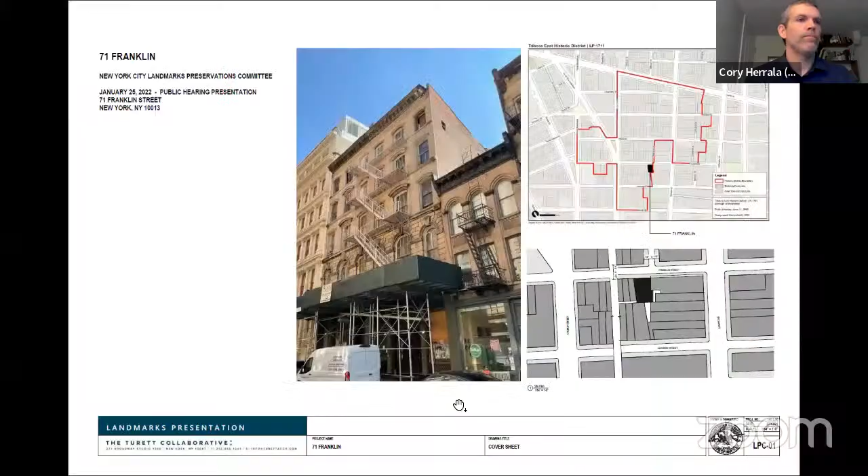Winnie, you're muted. Sorry, I was having some issues here. This item is 71 Franklin Street, located on the south side of Franklin Street between Broadway and Church Street in the Tribeca East Historic District.

Here are some historic photographs that you saw last month. Here is the existing and proposed axon diagrams of the building. And here are some streetscape photos.

The commission approved a proposal for a visible rooftop addition and alteration to the storefront infill at this building back in 2015. That approval has since expired, and the applicants returned to present a similar proposal at the public hearing last month on December 7, 2021, which included work at the vault light covers, replacing storefront infill, replacement of windows throughout the front facade matching the historic windows in terms of configuration but not in terms of operation, and the construction of a rooftop addition. At the public hearing last month, the commissioners present expressed concerns regarding several aspects of the proposal.

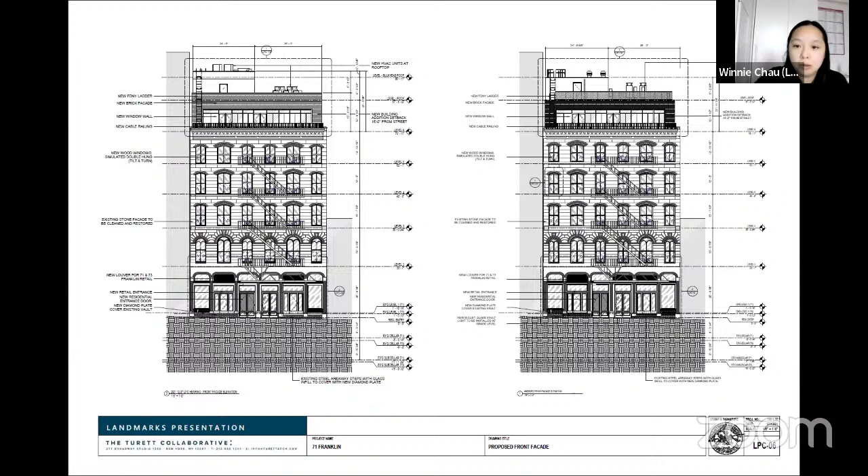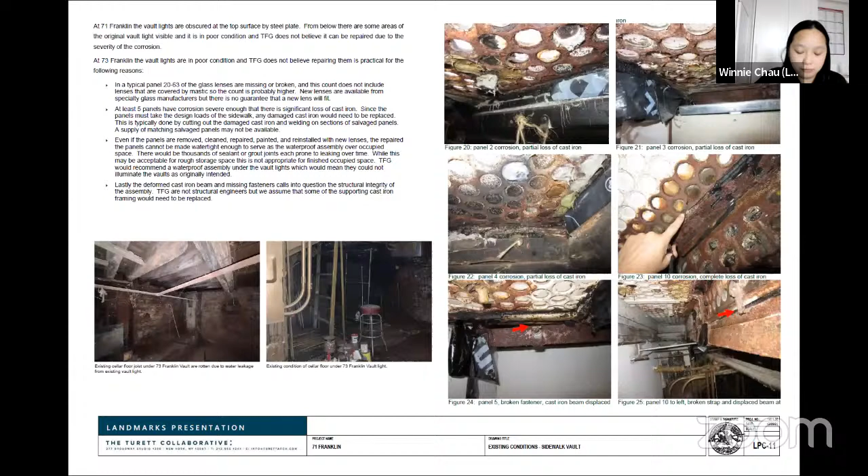While supportive of the general configuration of the storefront infill, some commissioners expressed concern over the removal of the historic transom bars and paneling at the infill. In response, the applicant has modified the design of the infill at the base of the building to incorporate a

dentillated transom bar matching the historic one across all the bays at the base of the building. Here are the proposed elevation and plan that was shown last time on the left, and the new revised additions on the right. And here are some close-up details and sections.

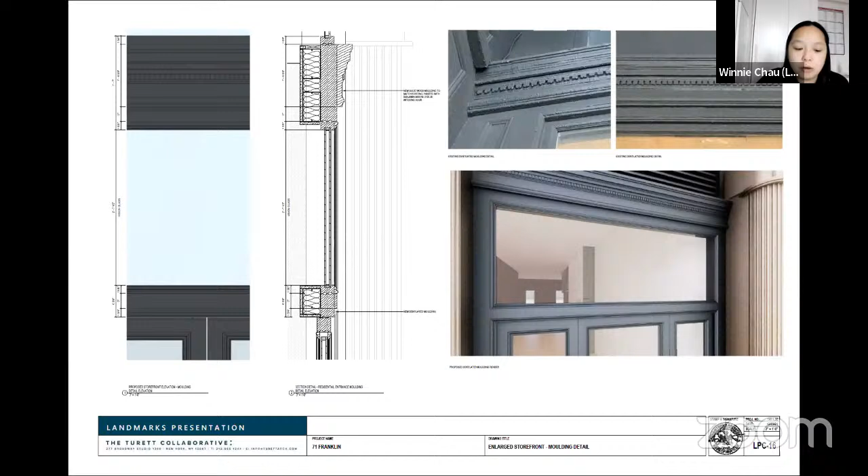Here are some close-up photographs of the existing historic transom bar on the upper right that they're proposing to replicate at this time. Here is a close-up of that plan view. And here are some renders of the new revised proposal at the base.

So with regards to the replacement of windows, the commissioners expressed support for the change in operation. However, some commissioners were concerned with the details of the replacement window. In response, the applicant has worked with the windows manufacturer to refine the window details to ensure that the replacement windows will match the historic windows as much as possible while allowing for the change in operation.

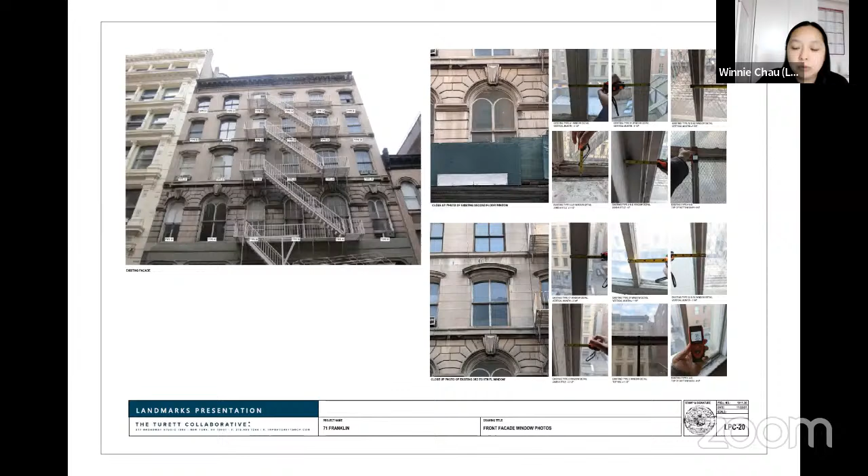Here are some close-up photographs of the windows, and here are some of the detail drawings for the different window types.

With regards to the rooftop addition, the commission expressed a consensus of support for a rooftop addition. However, they were concerned about the height and finish of the addition and detailing of the cladding materials. To address this, the applicant has changed the solid parapet at the addition to a cable railing and the parapet at the elevator bulkhead to a curb with safety railings where needed only.

The color of the addition has also been restudied and is now proposed to be gray instead of off-white. The applicant has also added additional details regarding the proposed brick and stucco cladding and is proposing the brick to wrap the corner of the addition as shown in the details on the slide.

This slide shows the change in the parapets of the addition. The applicant has also relocated the mechanical equipment previously proposed at the roof of the stair bulkhead to the roof of the penthouse to remove the bulk at that location.

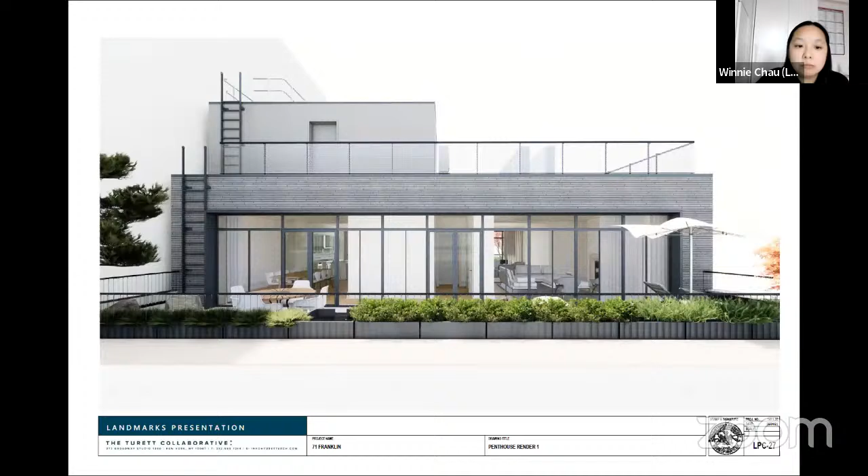Again, the previous proposals on the left and the new proposals on the right, and here are the refined details for that. Here's the revised render close-up of the penthouse addition.

And here are the modified renders at the sidewalk. Again, the mock-up is on the left, the previous proposal is in the center, and the new proposal is on the right.

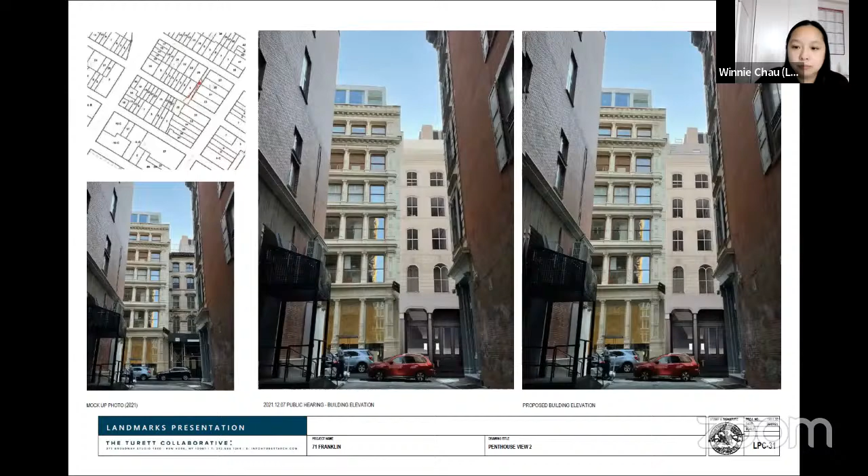Commissioners, do we have any questions for Winnie or the applicant?

Okay, and I just want to confirm they did revise the window details so that they're closer than previously presented. Yes. Okay, great.

All right, and I'll just also note for the record that we did receive a written letter in opposition from an individual on this revised proposal.

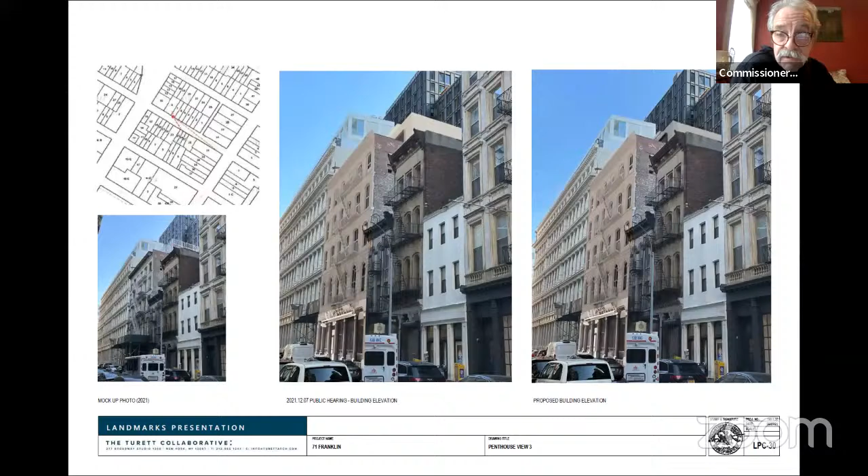Okay, Commissioner Devonshire? Yeah, I think it's much improved, and I agree with most of Ann's comments. And with regard to the sidewalk vault, I'm happy that they've seen the light.

Okay, Commissioner Chen. Yeah, I'm glad anyone is enlightened. I agree with Ann, Commissioner Devonshire, and the other commissioners' comments as well. I think it's appropriate.

And Commissioner Lutfi. I agree. I think these are changes that have really refined the project and make sense. I can definitely approve it. I also appreciate the fact that they have been working with the window manufacturer and the staff on the details of these windows, and I think they should continue to work with staff.

Jefferson, I think last time you hadn't seen enough information to comment, but at this point you've seen the response. So how are you feeling? I think on all 4 items, much improved. I can approve this. Commissioner Gustafson.

Yeah, I think I agree with the fellow commissioners. I think this is appropriate as is. It seems to me the applicant was very, very responsive, and it seems like a win-win, one of those situations where we commented and the applicant gets what they want in terms of the changes they need on the building, and they do it in a way that is appropriate. So I'm grateful that they listened.

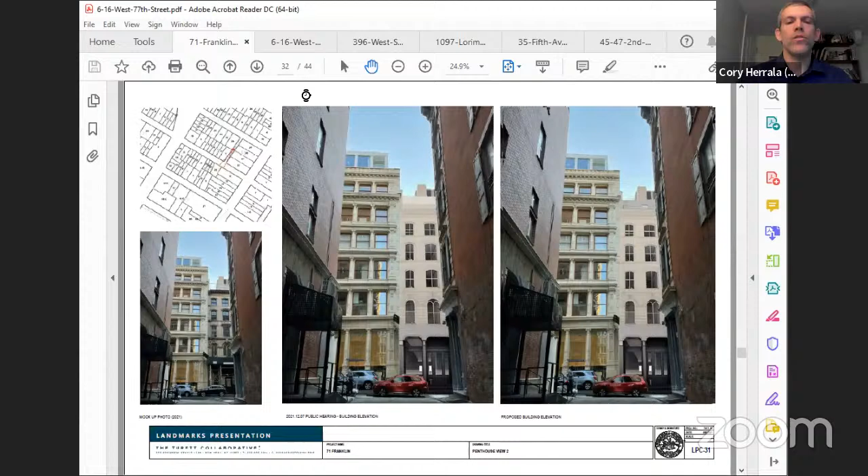An application for a certificate of appropriateness in the Borough of Manhattan, Block 1129, Lot 39, 6 to 16 West 77th Street in the Upper West Side Central Park West Historic District. This is a neo-Renaissance style apartment building designed by Nathan Korn, built in 1927, and the application is to construct a rooftop addition. This was last presented at the public hearing of November 16th, 2021, and no action was taken at that time.

The staff will do a brief introduction before the applicant presents the revised proposal after we open the proceedings. Okay, great. And I think I'll just go ahead and suggest that we do that now so that it can be a seamless transition when we get there.

So Commissioner Jefferson, would you make a motion to open the proceedings? I make the motion. Thank you. Commissioner Lutfi, would you second that motion? Second. All in favor, say aye. Aye. Any opposed? Okay, so the proceedings are open and the applicants may speak after the staff introduces the project.

Good morning, Commissioners. Julianne Wiesner-Chianese, Preservation Staff. The proposal as presented at the public hearing of November 16th, 2021 is to demolish a rooftop addition and to construct a new rooftop addition. At the public hearing, a majority of the commissioners expressed support for the proposal. However, some commissioners had concerns about the degree of visibility of the proposed addition from Central Park West and Central Park, especially the 18th floor, and requested that the applicants restudy the placement and massing of the 18th floor.

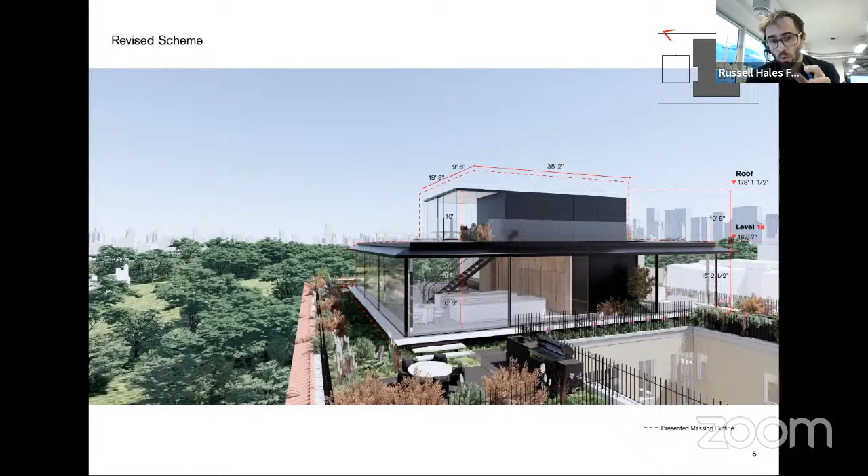So here's a render of the new proposal. You're seeing it from behind here, but you can see the upper mass, the darker element, that's the MEP component, now reduced down from 12-foot to 9 foot in height, and seeing the edge of the glass box.

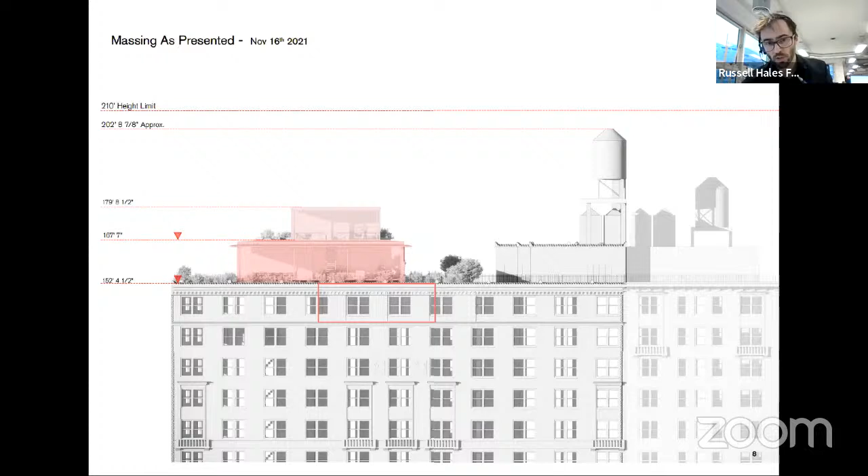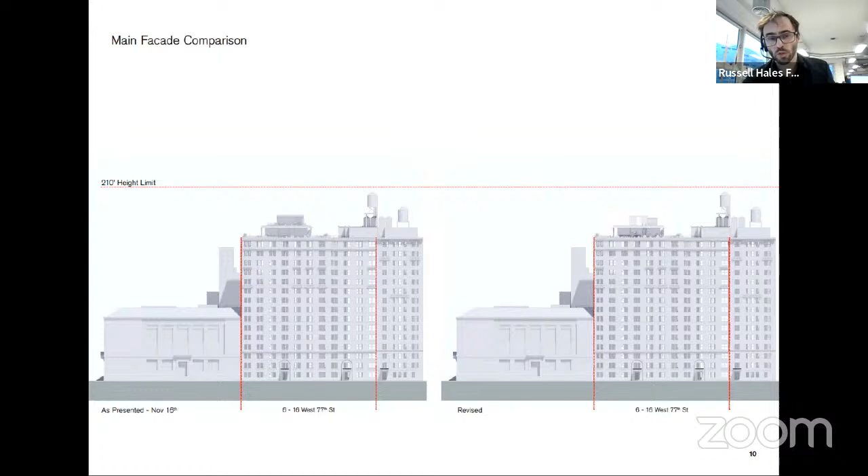But with our new design, you can see the overall width is reduced and the height has come down. The slightly faded pink box shows the new massing that's visible from the street. It's really a third reduction in its width, and here's the side-by-side comparison, thinking about how we can reduce its presence by breaking down that massing upstairs.

Looking at the cross section where we were before, and stepping forward to the next slide, the big moves here are by making these changes and changing the detailing, removing sliding doors and making the glazing more fixed at the upper level, we can reduce the detailing around the edge and bring that height down by the 1 foot 7 inches we mentioned. On the western side, the MEP component is brought down as well, to try and create a much more lightweight construction overall.

Volumetrically, it's about 17% smaller, but significantly the upper roof is 30% smaller than the overall roof we had before. We've studied, and we're working with Silmans, the engineers, to look at opportunities to reduce and compress the level 17 floor build-ups. There's an ongoing discussion that we may be able to get a few extra inches out of that steelwork, but it's very important to spread the loads into the existing micro columns that run through the building.

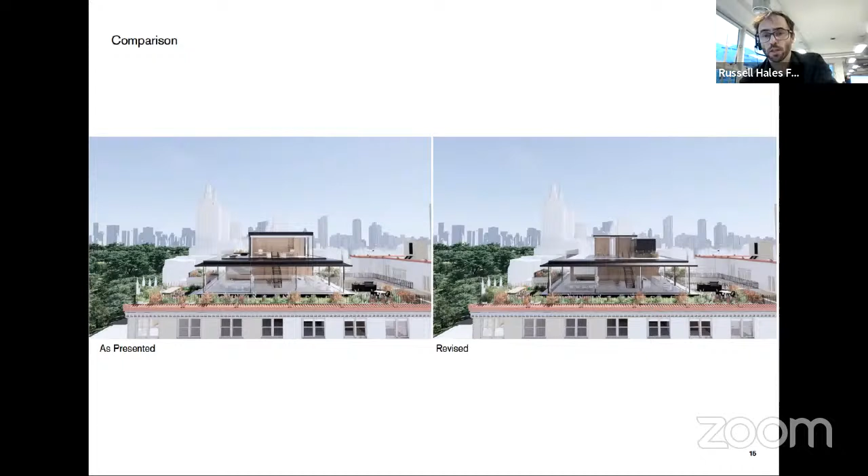We feel the upper box is the dominant element that's visible, and that's the one we've put the most focus on to try and reduce the visibility. So the render we showed you before, as you can see in the upper box, slightly heavier detailing at the very top, and then showing a side-by-side comparison with the previously presented on the left, and the revised architectural solution on the right.

Just moving downstairs to level 17, no real changes here. And then we have the lower level embedded within the historical building, where we have the 3 further bedrooms down here.

And then going back up, a viewpoint you would not normally see because we're floating outside the building, but recognizing now the change in detailing for the upper level 18 box, a much more slimline edge detailing, similar to the lightweight filigree steelwork within the neighboring dunnage.

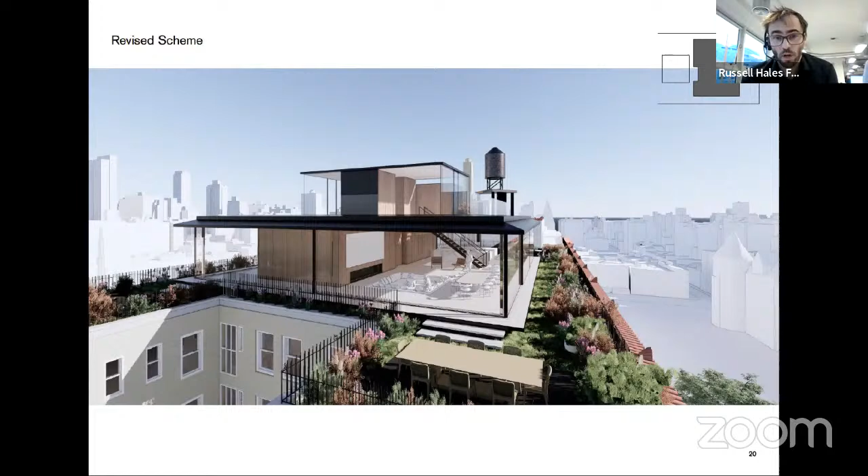We've studied this a lot from a visibility point of view, but we actually think architecturally it's a much stronger scheme than where we were before. So we do thank you for the opportunity to come back and share this, because we think it's actually helped push the scheme on further.

So you're really seeing the comparison side by side here, which I think tells a lot, that you can see the bulk and the mass has been reduced and it's much more lightweight. So it has a different architectural solution. It's the same family for the upper level, but much more lightweight.

Looking at that from the northeast corner and then showing the revised. Within here, it's not just the height that's come down, it's the overall footprint of the living space - the studio roof has been reduced by 30% in this configuration, which makes a big difference from the viewpoints. And then the side-by-side comparison here.

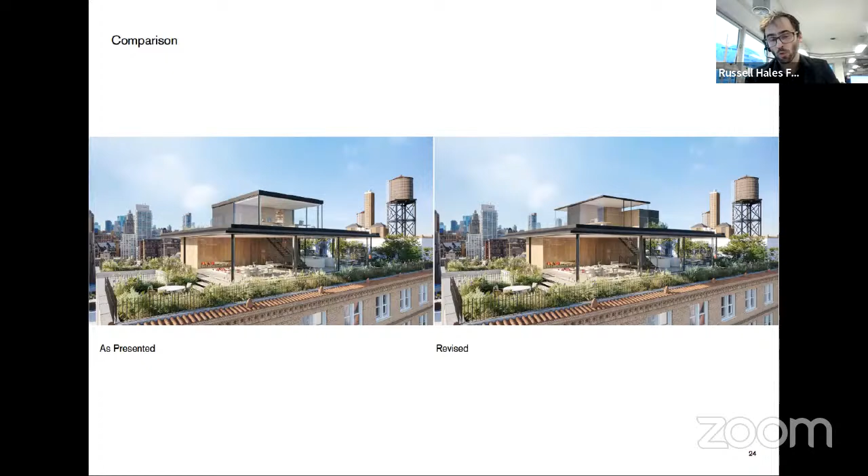So on the right-hand side, much more lightweight. But again, still having the pavilion for the main floor downstairs, which is respectful of the original footprint.

And then a few of the street viewpoints, obviously existing conditions seen from the park. And the next slide shows the previous proposal.

You can see at the top, the level 18, where we're looking very dominantly at that solid mass. But in the revised scheme, it's much more fragmented and lightweight now. So it blends much more into that rooftop dunnage and becomes much more subservient to the floor below.

So quieter in its nature by being more camouflaged into the background richness of the rooftops. And again, side-by-side comparison.

And again, a few viewpoints looking at the existing conditions here. As we showed previously, recognizing that the level 17 box is visible, but what can we do to reduce the level 18 box on top?

And in the new proposed scheme, reducing that east-west dimension helps to create a much more lightweight presence on top, and the side-by-side comparison.

And then the views from the park, the existing condition, and then where we were previously, feeling much more asymmetrical, where it's kind of north facing the glass box. Now a more balanced approach architecturally with the slimline roof, and the mass on the level 18 is where the existing elevator overrun sits anyway.

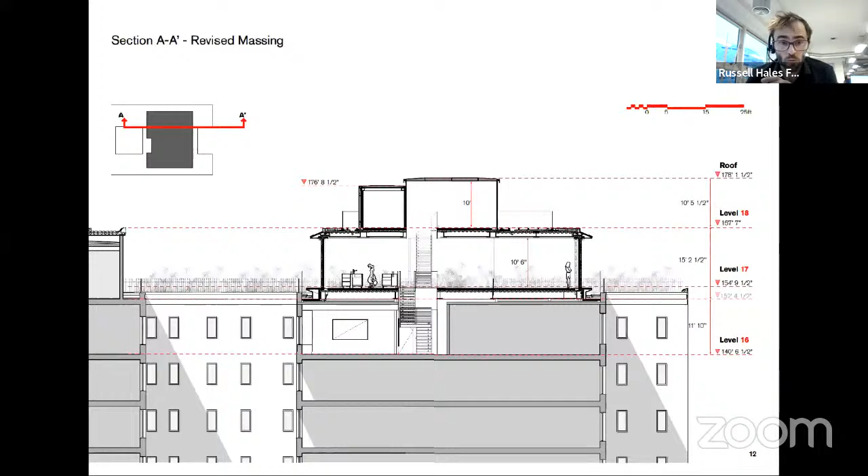Okay, so I think that is our presentation for today. Again, I think the important thing for us is the opportunity to go back and rethink the architecture for the upper level. We think the scheme is better for the conversation and for the redesign, both from a visibility point of view, but for architectural clarity as well.

So thank you very much.

Thank you very much. Commissioners, do we have any questions? Yes, Commissioner Goldblum, please go ahead. Thank you. Thank you for the presentation.

So forgive my ignorance, and you probably did cover this last time, but I just want to understand the bones of the scheme. The elevators are being brought up to the 18th level because they are an overrun of the elevation of the elevators to the 17th floor to provide access to the new penthouse.

Is that correct? Or do they provide access to the 18th level as well? So the elevator overruns that we see in the existing condition and in our design are existing - they are already there and they are servicing level 17. So there's no actual elevator stop at level 18 itself. That's the physical overrun of both the goods elevator and the passenger elevator.

So the top of the current elevator overrun is where you're showing your revised top of mechanical penthouse? Correct. So in the revised scheme on the right-hand side, the upper roof, the glass enclosure, aligns with the top of the elevator overruns, obviously including waterproofing etc., roofing over it, but that's now aligning with those elevator overruns.

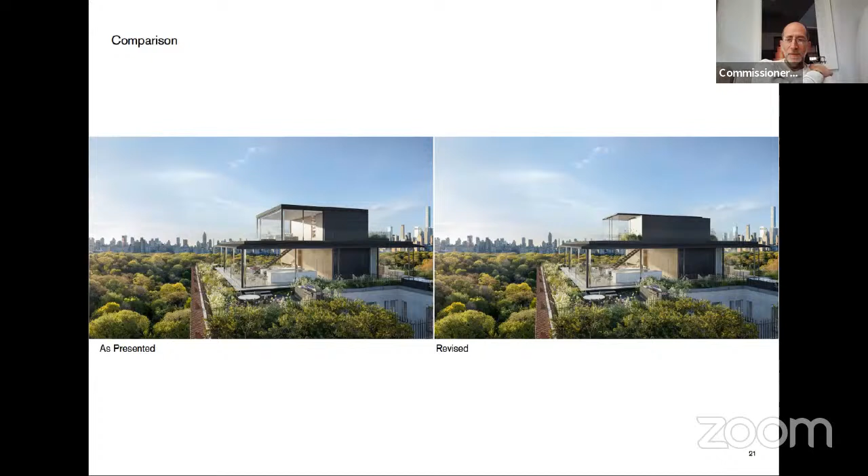The thing that makes this unusual is the 18th floor element. And I think the general comments before were suggestive, if not requiring, that it be removed. I think it would definitely be a better application if it were removed. But I think that if it's going to stay, it should have a reduced volume.

Okay, thank you. All right, and Commissioner Chapin, I think last time you were largely also supportive of the design approach. So how are you feeling with the changes we've seen today?

I think the changes are very positive. It's a fine design, and I think it's quite minimalist in approach, and I think that's a good thing. I think it is in the context of a number of other rooftop additions, and I think the idea of a modern addition here is perfectly fine. It is visible, there's just no question about it. It's going to be visible no matter what, as was the current situation and a lot of other rooftop additions on the Upper West Side and on Central Park West.

I think that Michael's comment is probably appropriate in my view. Lightening it up a little, I wouldn't go to a white, but maybe a lighter gray that could blend in a little bit more would lessen the visibility and call less attention to itself. But I personally think it is appropriate, even though there's an additional floor. I think that's the way they've put it together at this point. I could approve it as presented, with the suggestion they work with staff on getting a color that's a little more likely to just blend in with the skyline.

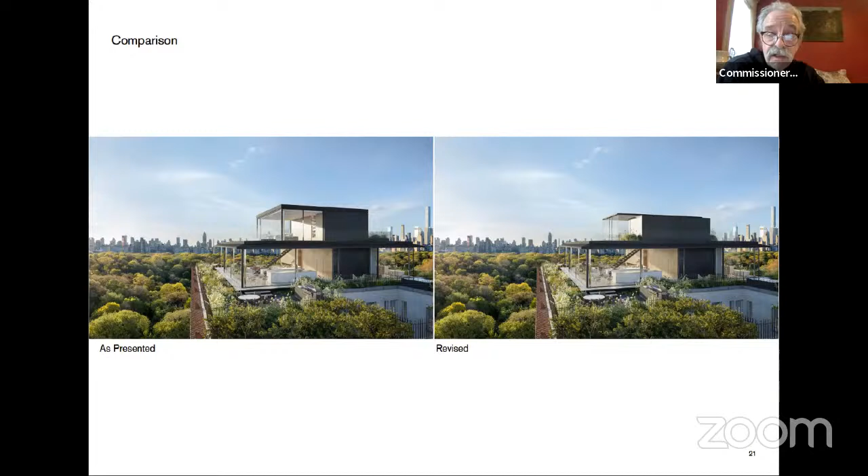Okay, thank you. Commissioner Holford Smith. Yes, well, I appreciate the changes that have been made. I missed the first presentation, but I agree with some of my fellow commissioners in that I think it is still very prominent. And as Michael Devonshire just pointed out, at night it is going to be this glowing box up there.

So I think the lower volume, the 17th floor, currently has a 10'6" interior volume, and I think that could certainly be lowered and still be very gracious. That would help reduce visibility all around. I agree with the color of the metal—I think it should be more like a zinc color. And I think that's true for all of the metal, not just the bulkhead, mechanical bulkhead, but all the roof eaves and everything, just to help reduce the contrast of this against the skyline.

But I think it should be brought down, and potentially even brought in a little bit, to reduce its visibility.

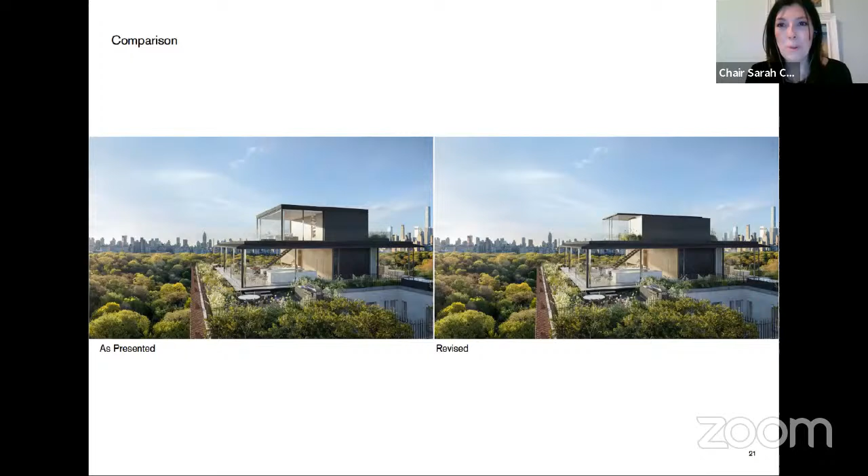So I think where we are is, again, we will take no action and we'll ask the applicant to continue to study this and think about our comments, which really speak to lowering both floors, looking at them holistically, and thinking about how you can reduce the visibility and explore the materiality and finish of the metal to help the addition blend and recede into the typical roofscapes we have on the Upper West Side. So we'll take no action and ask the applicants to come back when they're ready with a revised proposal. Thank you all, and we'll move to the next item.

The next item is public meeting item number 3, LPC 22-00769, an application for a certificate of appropriateness in the Borough of Manhattan, Block 636, Lot 41, 396 West Street, in the Weehawken Street Historic District. This is a neo-Renaissance style hotel designed by Charles Stegmeyer and built in 1903-04. The application is to install storefront infill and signage, alter the facade, and construct a rooftop addition. This was last presented at the public hearing of November 23rd, 2021, and no action was taken at that time.

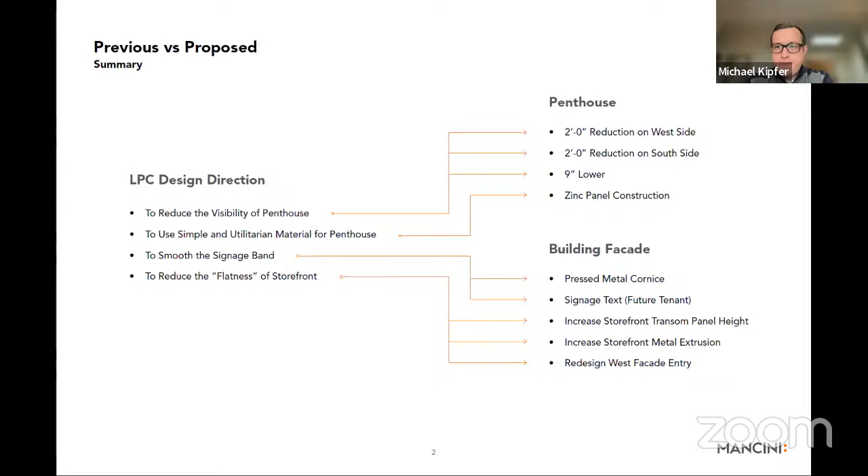Michael, are you there? Yes, I'm here. Okay, all right, I'll get started. So I'm Michael Kipfer. I'm from Mancini Duffy Architecture, and we're representing the applicant for this location. As James pointed out, we have come back with a few redesign items that we'd like to present to you, and thank you for hearing us today.

So to just jump right into everything here on the screen, you can see a diagram generalizing some of the comments that were made and some of the actions we took. To reduce visibility, we inset the penthouse 2 feet on the south and west sides, and we also lowered the penthouse. We used a new type of construction and materials for the penthouse to address the notion of simplifying its materiality, moving to more of a utilitarian material that didn't compete with the building's historical character down below. Then at the bottom, there was a lot of talk about the previously presented brick sign band, so we moved that to more of a pressed metal solution, and we reduced the flatness of the storefront in general by adding different types of profiling to help add more depth.

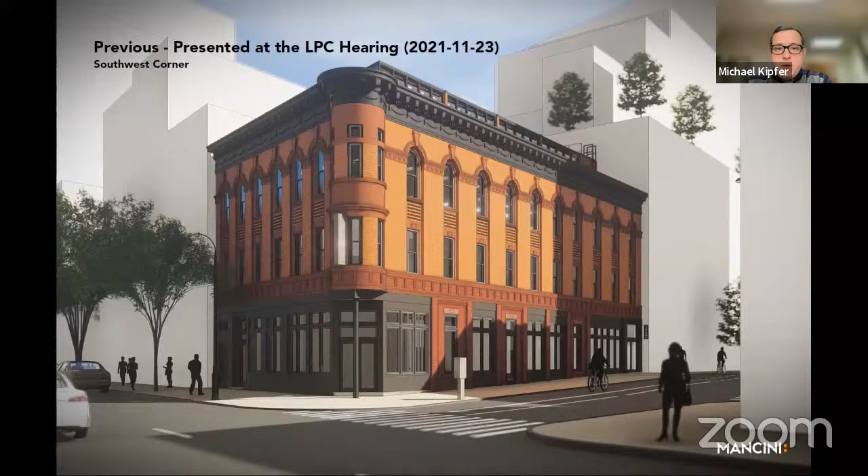Going up to kind of the general view of the project, this is what was presented at the last hearing. I think the biggest move we're going to make here—I have the revised one on the next slide—is just how much contrast there was from the penthouse above and the pressed metal cornice above, and then down below, the brick sign band, and if that could have a more appropriate solution to what was probably originally there.

So going to the updated render, obviously from this specific view, you can see the biggest change is the inset 2 feet on each side and lowering the penthouse 9 inches. At least from this view, that settles the visibility problem. I'll move to the next slide in a bit that shows the penthouse design.

But down on the street level, you can see we added a more simple streamline signage band with a pressed metal cornice solution. The idea here is not to have too much going on in the sign band. We don't want to detract from all of the details in the second and third floor, with all the terracotta ornamentation and the lovely existing cornice on the building that we are just restoring.

So we wanted a more utilitarian focused sign band down here instead of trying to add too much decor to everything. The storefronts have also—we've increased the depth and the profiles on the storefronts, and we've raised the glass as well, which you'll see in another slide, just so it has a little bit more of a bold presence.

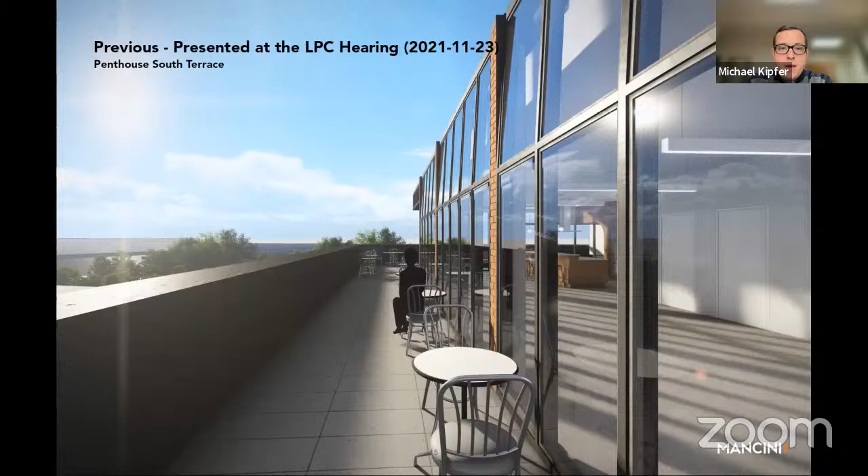I'm referring to them as inset piers, where the windows, through their mullion character, are creating that repetition. And once again, you can just see how we inset the building from the edge, just to get a little bit more sky in there. Coming down to the other side, the original design, you can see those piers coming from the building, and then obviously a large setback in the redesign that was considered.

Our previous design, moving in toward the storefront level and the sign band—it exists today and throughout the majority of the history as just a backer brick that has stayed at this transom level throughout time. The original design was just trying to spruce that up, but we do agree that some type of cornice, a banding, a cap to the storefront is appropriate here.

So we added a more simplified utilitarian sign band here. It's still pressed metal, and it's still capping the lower level piers that are coming up, because the piers do change as they go up to the second and third floors. But it still has the character and some of the seams that help cap everything.

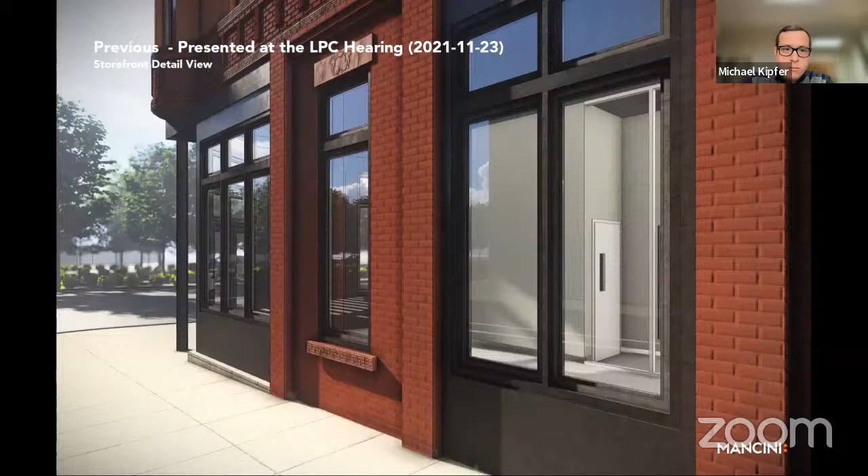Moving on to more of a zoomed in profile. One thing I want to point out here, this is the original design that we had presented previously. You can see there's a lot of layers in this storefront level, especially at the transom header. So moving on to the new design, we just raised up that transom glass.

We think it brings a lot more of a consistent nature to the storefront level. And you can see some of the profiles that we've added to the vertical and horizontal mullions of these storefronts to help bring the depth out in this. And you can see we have the current backer brick more in line with these piers. We've protruded the cornice a tiny bit out just so that it caps those piers and sets you up for the transition to the upper levels.

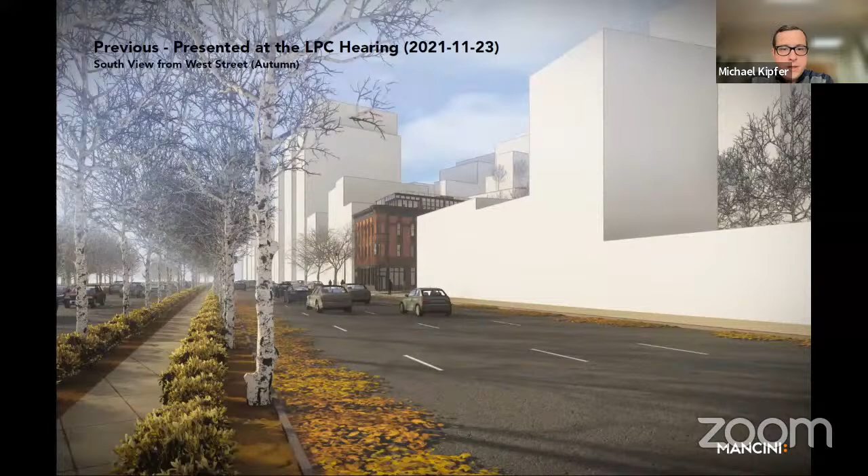Here we're just going into the fall pictures. That was the previous penthouse, and here's the new revised penthouse. Once again, a lot more of a utilitarian, neutral context that it's generating. This is the previous one, you can see the profile that's happening there, and then the new one where it's set back a lot more and is just a lot more neutral.

I'll kind of just jump through these. Here's another view of that. Moving on to the specifics.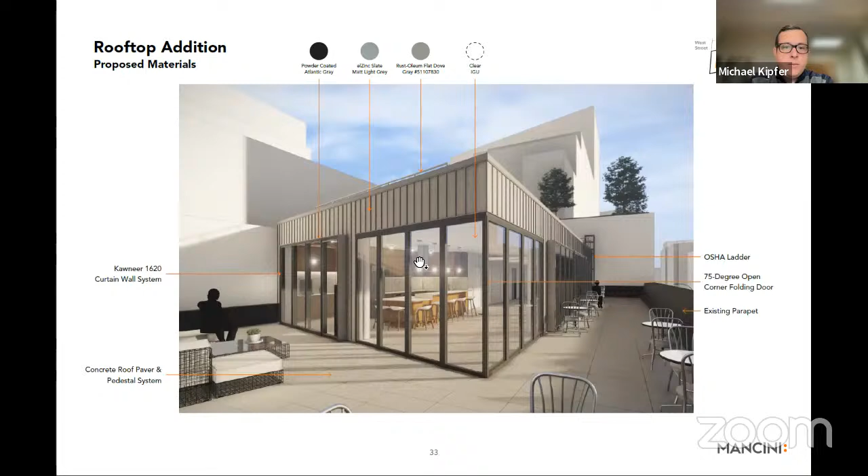So we are going for a glass system with a black powder coated mullion system. And then there's this really great material, a standing seam zinc cladding system. The gray is very neutral, not too bold, not too shiny. It provides that nice neutral background with the materiality that's going on there. Here's just a little bit more zoomed in of all the components that are there with the zinc panel and the storefront system.

A few elevations, and these are just really more to show the reduction in height that we proposed in the offset from here. Once again, 2 feet and 9 inches.

The plan just to show, we're slowly creeping in when we did that offset on the usable nature of up here with, once you count in the core, the egress and the ADA access that we have in here, we're left with just over 14 feet of usable space of the penthouse. So we thought the 2 feet achieved what the commissioners were asking as far as trying to reduce the visibility while also keeping the minimal usable square footage up here to make the penthouse.

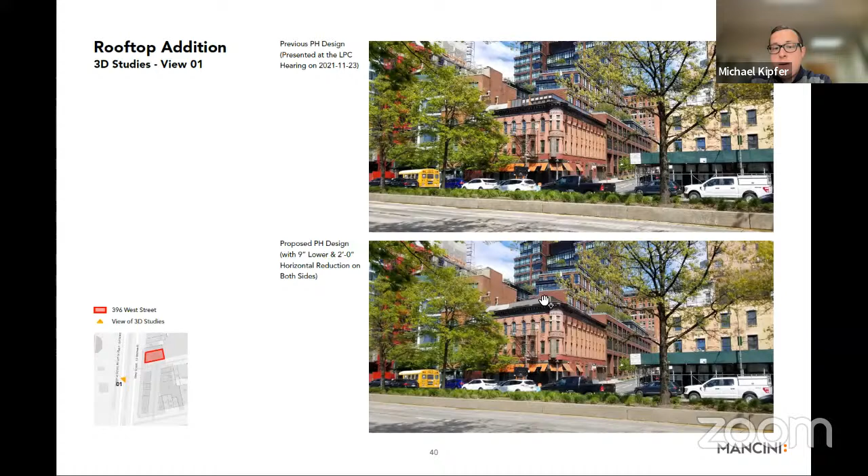We did update all of our view sheds. So here on the top of each page, you'll see our previous digital mock-up, and down here you'll see the new proposed mock-up. Once again, just getting rid of all of the complex character that was happening, still keeping a nice contemporary slim form, but not necessarily competing with the cornice. That was the really big thing, making sure we weren't competing with the cornice.

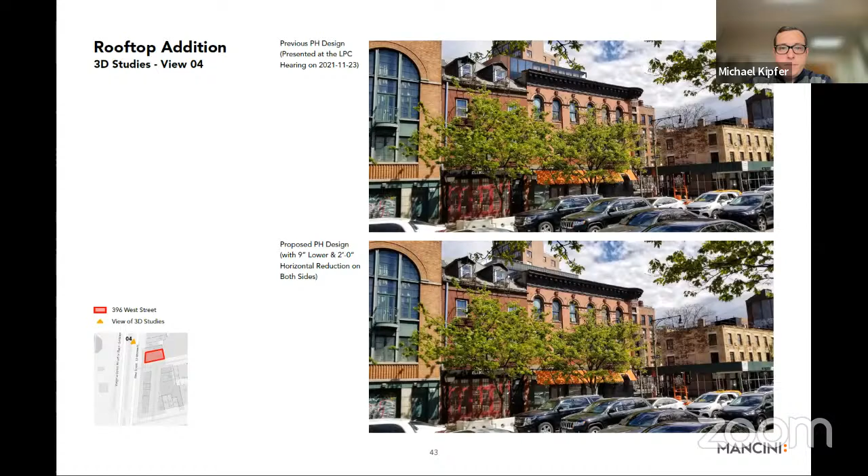A couple more view sheds through here. This is from the north side looking southeast. Here's down Weehawken looking up, and once again, just the cornice and the contrast is, we think, abiding by some of the comments from last time.

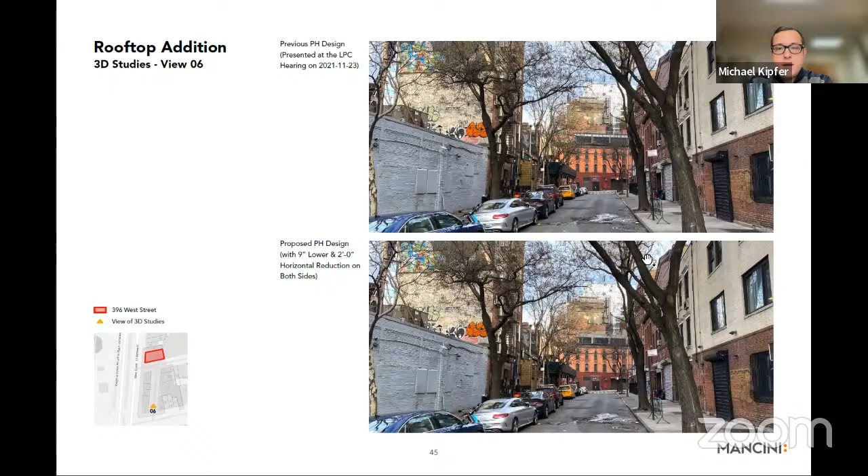Moving on, we did get a new shot down Weehawken as well, now that it's winter. And you can see the contrast is a lot better.

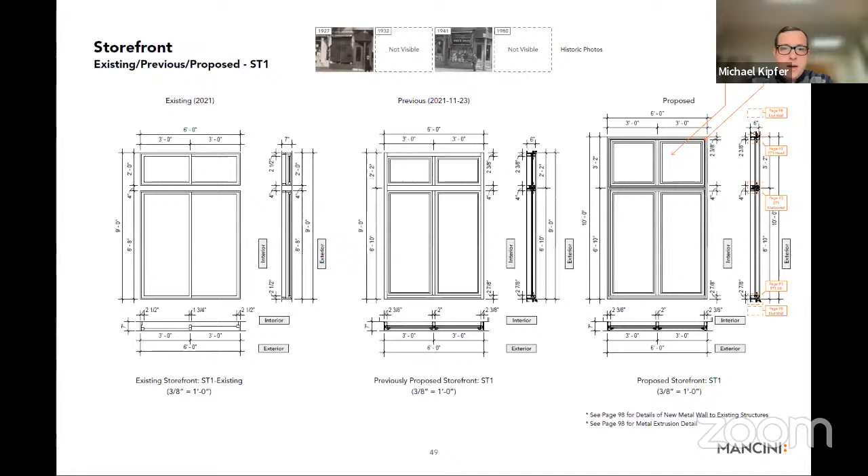Storefronts and openings, the same amount of storefronts and everything. The biggest thing being, the last time our transom glass wasn't as tall. We think it fills that opening a lot more without having to have the different sets of aluminum there. And then you can just see more of the articulation that's happening in the mullions. We do have back in the appendix full details of all these situations.

Signage, pretty much everything is at staff level except for this marquee sign at the corner of the building. Throughout history, there's always been a marquee sign. There is an existing marquee sign there. We're seeking to restore that and replace it with the building's address.

And that is just the ending slide of everything we've done. Happy to answer any questions.

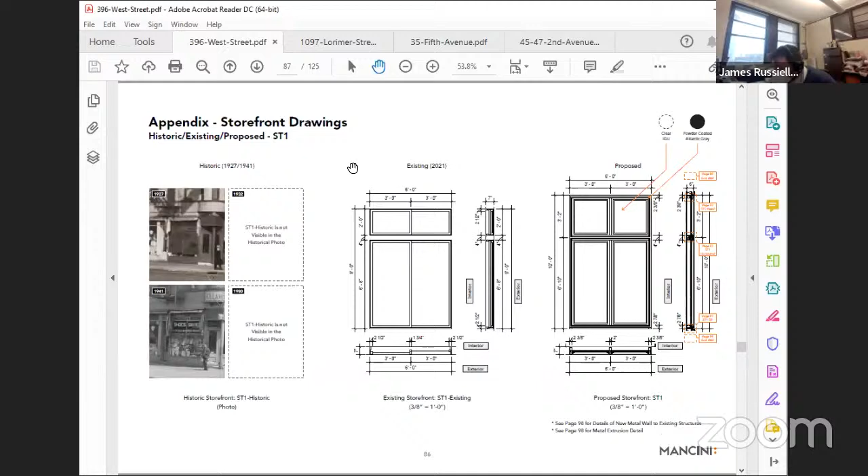Commissioner Holford Smith. Going back to the coloration topic, in your appendix where you show the cleaning tests, it appears that the brick at the ground level is a buff color, which actually, if you go back to the 1927 photo, you can see how the building appears much lighter. So my question is, would you consider stripping the paint off and restoring the original color of the building rather than painting what appears to be a much later, much darker color to the building?

Yeah, we did try to see the condition of the buff brick, and it wasn't a consistent finish when we tried to strip it. We stripped it per all the guidelines, and it wasn't a consistent color under there, and that's when we decided that we'd rather just restore or repair the paint to match the existing colors of the building.

Yeah, it appears that the ground level brick is a different color than the upper level brick. Yeah, they seem to have different qualities and finishes under each part. I think there's three types of bricks that we're playing with here. There's kind of the ground level, there's the backer brick, and then there's the upper level. And all of them were coming out in inconsistent finishes when we stripped it. And we kind of do like the character that's happening with the two-tone of the building, so we decided to just maintain that color.

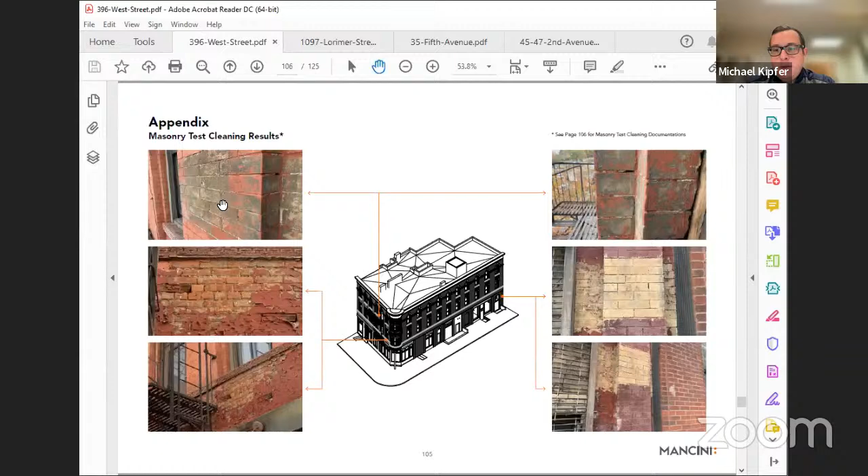I don't know if that answered your question, but that looks like a first pass with a paint removal material. Did you pursue that further? Yeah, so they tried without a remover, just under the PSI that you're allowed to, and when that got to a certain level, they tried the chemical agent that was approved. They let it sit and dry and all that kind of stuff, and it got us to this point. So we tried a couple passes at the removal.

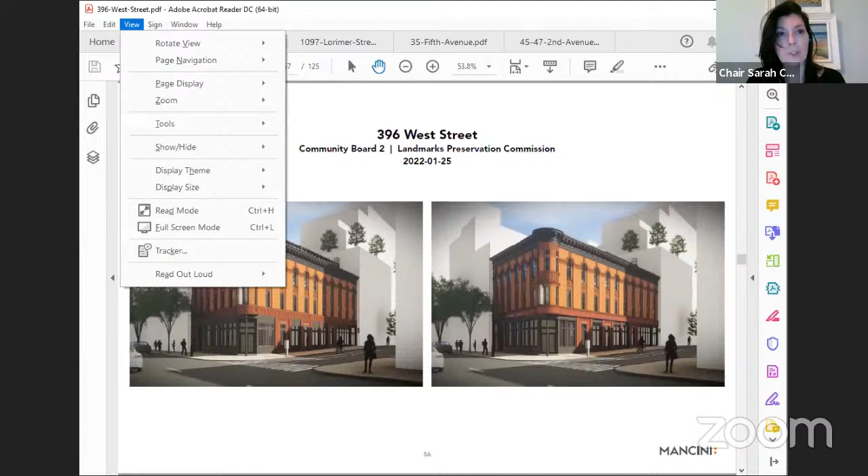Okay, thanks. All right, other questions? Okay, I don't see any other questions, so I'm going to start sending you requests to unmute yourself so that we can begin our discussion.

And so this proposal included the penthouse, the storefront work, the corner sign, and then they were proposing a treatment at the former location of a cornice above the storefronts. And at the last public hearing, I think the commissioners were comfortable with a visible addition, as James said, given the surrounding context, but asked that it be reduced and simplified. And we asked for some changes to the storefront details, and I think we asked them to explore doing a more traditional cornice. And now we've had this further discussion on the paint removal.

So let's go ahead and start our discussion. Commissioner Devonshire, would you like to start this one?

Yeah, thanks, Sarah. I'm okay with this. I think if we went back to what might have been an original cornice, which would be much more ornate at the storefront, it would clash with the more simplified window surrounds. So I'm okay with what they've done here.

Commissioner Chen? Likewise here. I think the only thing I would add is ask them to work with the staff about the storefront cornice, about the pressed metal, to have more details. I think Commissioner Devonshire cautioned about having it be too robust, so I would defer to his expertise.

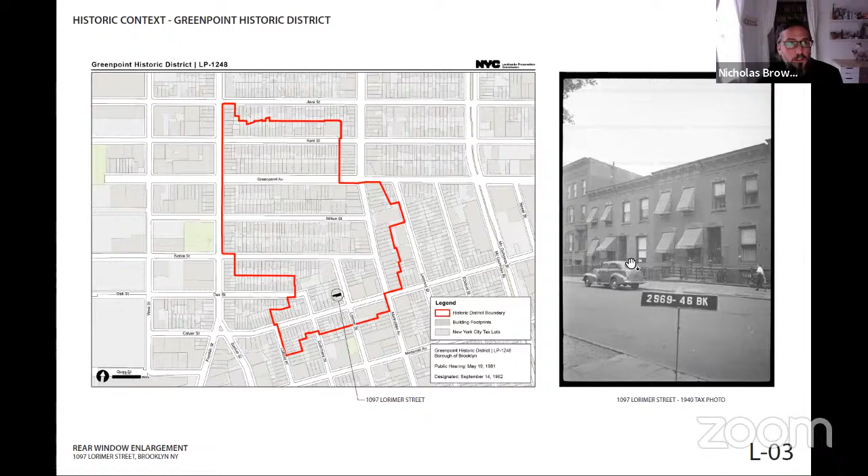Existing block plan, an enlarged block plan to show the location of the townhouse and its distance to Calyer Street. Again, there are 2 views where the rear facade is either partially or fully visible. One view here on Calyer Street, the corner is partially visible over this garage, and then on Guernsey Street, the rear facade is clearly visible across the rear yards.

And this is the view from Calyer Street. Again, the window in question is on the 1st floor, which is partially visible here. And then on Guernsey Street it's pretty clearly visible, the 1st floor kitchen window located here.

Exterior elevations, rear facade. The elevation on the right shows the existing elevation with the proposed enlargement dashed located here. The elevation on the left is our proposed elevation. When we first reviewed this with Community Board 1, we had shown a 3-panel window. But after speaking with them and really looking at the historic context, it became more apparent that 2 double hungs really fits this facade better.

There's an existing bluestone head and sill that we are going to be replicating for the new window. And again, just working with the existing composition, there is a variety of sizes. So the new windows, aligning with the window above, the proportion is the same proportion as the double hung above, just side by side.

And then the window elevation in detail, again, showing the bluestone head and sill that's going to match what's currently there. It's an all wood double hung window. And then the brick mold also has a historic profile. And then just taking these steps to really work with the existing facade and make this new opening more harmonious.

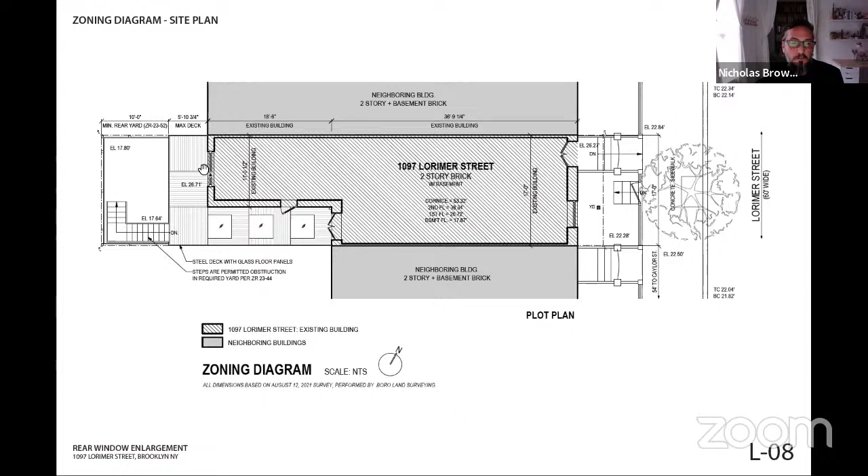And then exterior photos and details, these detail photos showing the rear facade, the bluestone head and sill, which will be replicated in the new window. And then the kitchen window located here.

And then just photos of the neighboring buildings. The photo on the left is looking towards 1099 Lorimer Street, and then the photo on the right towards 1095 Lorimer. And that's pretty much the presentation. Okay, thank you very much.

Commissioners, do we have questions? All right, not seeing any questions.

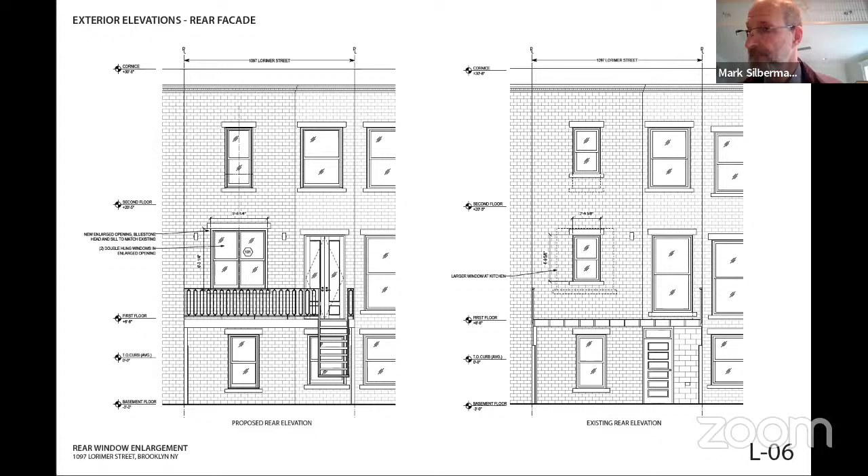An application for a certificate of appropriateness in the Borough of Manhattan, Block 568, Lot 1, 35 Fifth Avenue in the Greenwich Village Historic District. This is a Neo-Federal style hotel building designed by Schwartz and Gross and built in 1925. The application is to replace windows and install rooftop mechanical equipment.

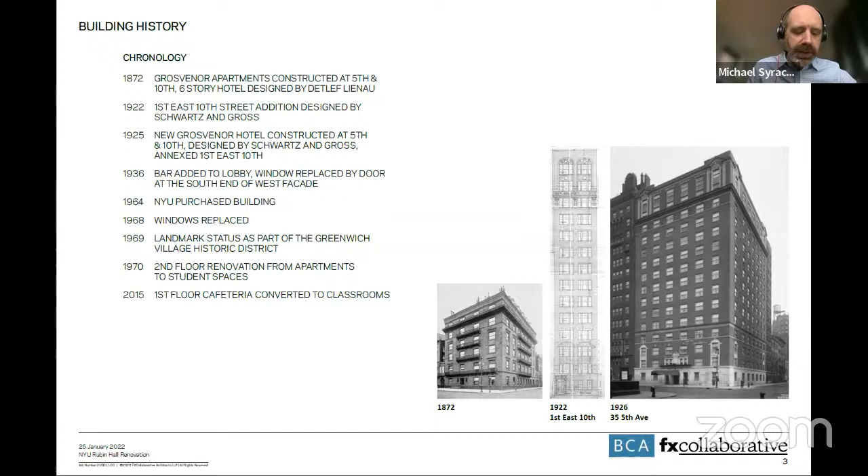A little history about the building: it was constructed in 1925 as the Grosvenor Hotel, replacing an earlier building on the site. It's connected to 1 East 10th Street immediately to the east, referred to as the Annex. NYU purchased the building in 1964 and replaced the historic windows shortly thereafter. The landmark district was established in 1969, and there have been incremental updates to the building since that time.

The goals for the project include rehabilitating and preserving the building's historic fabric, reinstating the historic window configuration, significantly improving energy efficiency in accordance with Local Law 97, creating a high performance, EnerPHit or Passive House certified building in this renovation and future renovations, installing an all-electric fossil fuel-free HVAC system, and increasing life safety and resiliency by adding an emergency generator. The project is anticipated to be complete in 2023.

The scope to meet those goals includes replacing the windows and reinstating the original window configuration and finish color, replacing and adding equipment to the roof, and installing the emergency generator inside the existing tank house on the roof, which requires infilling windows on that tank house and adding a louvered opening in that construction.

So for the windows, I'm going to pass it to my colleague, Lizzie Himmel. Hi, good morning. My name is Elizabeth Himmel, I'm a designer with FX Collaborative Architects.

This photograph is really our most valuable archival documentation for understanding how the windows originally appeared on the building's primary facades before they were replaced in 1968. You can see they are double-hung windows with a light colored finish, and from the historical scale figures at the bottom, you can see the windows are also quite large, with the predominant size at 6 feet wide by 6 feet tall.

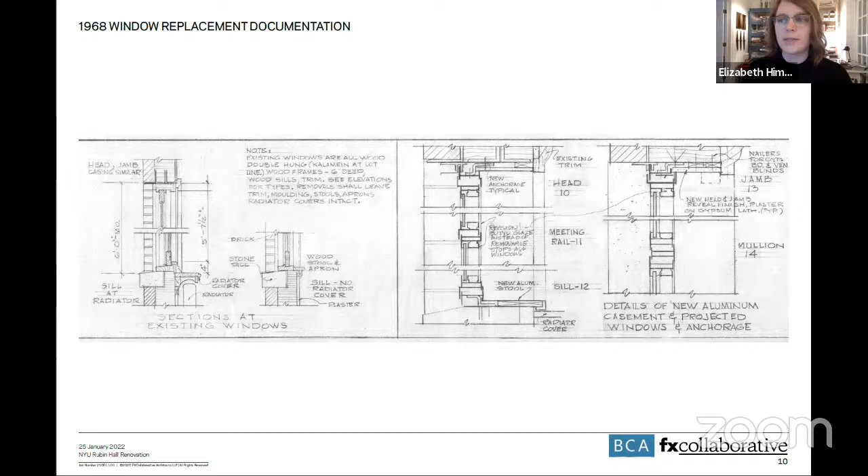The next slide shows comparative sections from that same 1968 drawing set. Together with the previous slide, this is all the documentation we have of the building's original windows.

The next slide shows that the primary facades for Rubin Hall are the west facade on 5th Avenue and the south facade on 10th Street, shown in red in this diagram. We also have secondary visible facades to the east and north of the Annex building, shown in blue, and a courtyard considered secondary non-visible to the north, shown in green.

The next slide shows elevation diagrams illustrating how we assigned replacement window types to reinstate the original window configurations based on the documentation just shown. On the ground floor, the red dashed boxes show the only existing historic windows still on the primary facades.

We've tagged these HA on the west elevation and HB on the south elevation at the base of the annex building, which was built a couple years earlier and then incorporated into the new hotel in 1925. So the windows on that annex building are a little bit different.

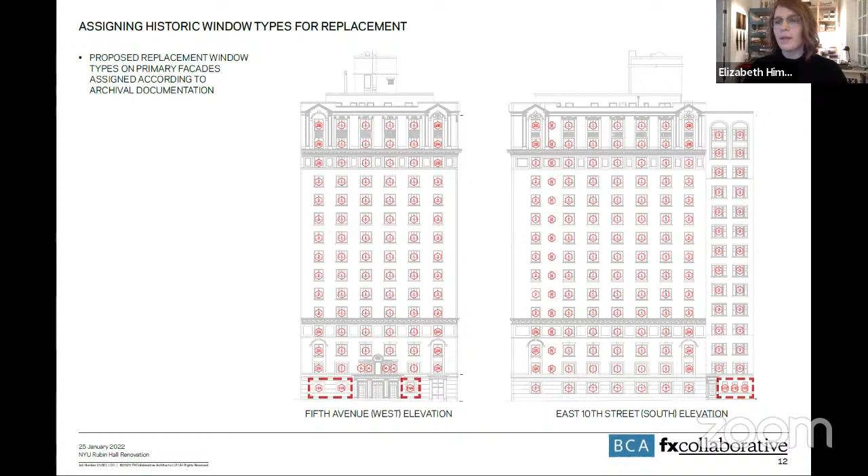On the next slide, we're showing drafted elevations of what we believe all the historic window types to have been. Outlined in red at the bottom are the 2 existing historic window types I just mentioned that are on the primary facades. We also have 2 other existing historic window types remaining on the building on the east facade, which is a secondary visible facade, outlined in blue. The rest at the top are extrapolated from the archival documentation.

The purpose of this slide is to outline the process we took to arrive at the windows we are proposing for this project. As Michael mentioned, we have very high performance goals for these windows. But in addition to performance, we also have a number of other specific criteria to meet, including durability, historic appropriateness, accessibility, and also physical constraints.

To start with, we know that we need to replace these windows with either double hung windows to match the historic, or simulated double hung windows with details closely approximating the originals. Unfortunately, true double hung windows cannot meet our air tightness requirements for this project, so we needed to look for high performance simulated double hung windows. We have a target U value of 0.18 to meet Passive House EnerPHit criteria, which is quite low.

From there, we discovered that we need to use aluminum windows because wood windows do not meet the durability requirements for a high-rise building. So we know we need an aluminum window, and because we need to closely match the details of the original windows, we need a simulated double hung with the glazing planes of the 2 sashes offset the way a true double hung window would be. The only 2 manufacturers were able to offer high performance aluminum windows that meet that requirement, and they are both custom products that we have developed with them as part of this design process.

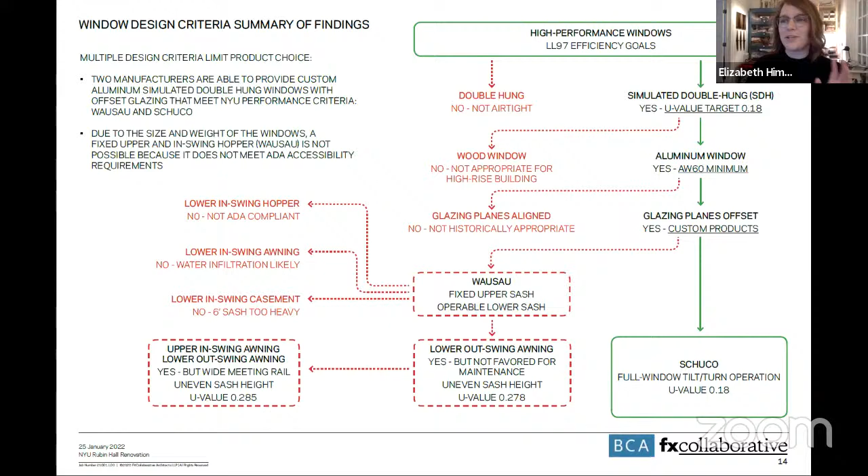The next slide shows a section through the Schuco window we're proposing. Except for the method of operation, this window will be reinstating the original configuration of the historic windows with a narrow meeting rail and offset glazing plane. There will be a custom aluminum brick mold wrapping the frame on 3 sides to match the original windows, and that profile is based on the remaining windows on the ground floor 5th Avenue facade.

As you can see in the section, the whole window tilts in as a hopper for ventilation with a 4-inch limit stop. And for maintenance only in most cases, it also swings in as a casement window so that it can be easily kept clean from the inside.

For the bedrooms that are designated accessible, and any bedroom in which a student requests accessibility, the windows can be operated as casement for ventilation, again with a limit stop. So that gives us great flexibility for universal access in the dorm rooms. I will show where that occurs a bit later on the facades. And again, this is the highest performing window that we looked at, and in fact is one of the highest performing windows available.

On the next slide, you can see on the left existing non-historic windows on the south facade and west facade, and on the right, the reinstated historic configuration with our proposed windows.

The next slide shows us again the south facade, current on the left and proposed on the right. The next slide shows a comparison of the existing type HA windows, historic type, on the ground floor west facade.

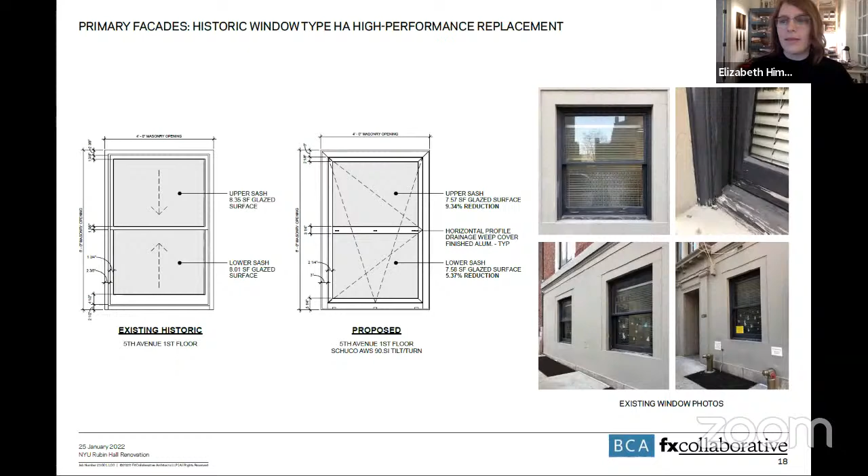And what the proposed window will look like, also showing the percentages of glazing reduction for each sash, which are within the LPC recommended percentage for high performance windows. The next slide shows a rendering of what that proposed replacement will look like when closed.

On the next slide are the details comparing the heads, sills, meeting rails, and jambs.

The next slide is the same elevation comparison for the type HB windows on the south facade of the annex building. We will be removing the window bars from these windows, and the space behind them is an existing bathroom. So these three proposed windows will have translucent glazing on the upper and lower sashes. This is the only place we're proposing translucent glazing on the project.

On the next slide, again, are detailed comparisons for this window, which is the same Schuco window across all the different types on the project and facades, this time also including an applied muntin, which will simulate the divided upper sash of this 4/1 window and any other divided light windows.

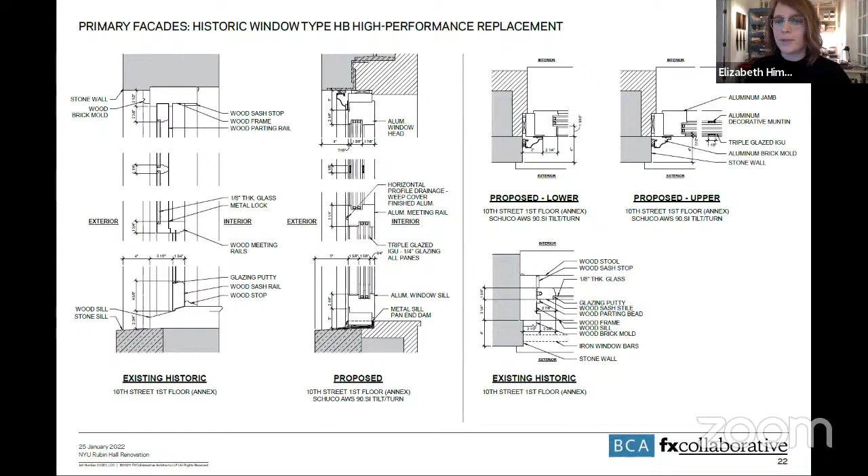The next slides we can flip through quickly to show how our proposed replacements for the non-historic windows compare with the historic types we identified from the archival drawings.

This is a diagram showing the operation of the primary facade windows for ventilation. Everything in yellow has the inward tilting hopper for ventilation with a 4-inch limit stop.

Everything in green operates as casement only, either because they're in accessible bedrooms, or in the case of these tripartite windows on the annex, because only the center light is necessary for ventilation since we're operating the whole window. So the side lights are operable for maintenance only.

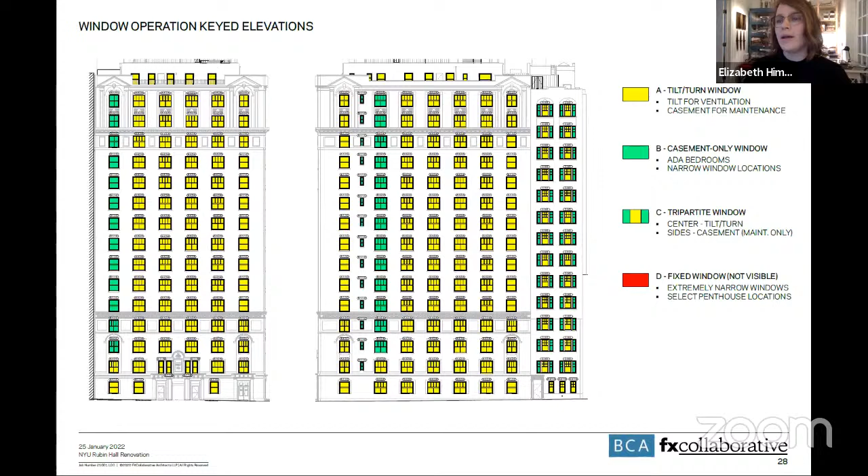On the next slide, we show how we chose a finish color based on the archival photograph matching the shade of the limestone accents of the building.

On the next slide, showing the triple glazed IGU that will help us achieve our very strict performance requirement to meet EnerPhit Passive House certification.

Lastly, on the next slide, some images show where similar Schuco tilt turn windows have been used within a historic district, although this is new construction and a bit different typology than what we're talking about here.

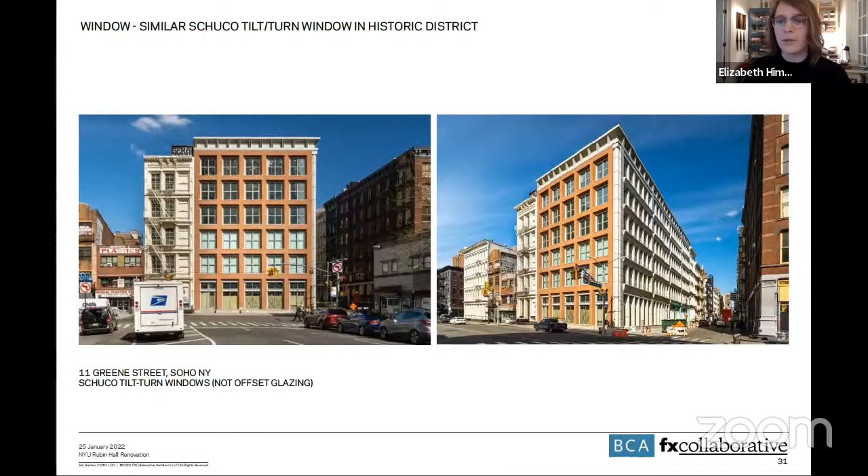And then Michael will walk through the rest of the scope of work. Great, thank you. So on to the rooftop mechanical equipment.

This is the existing roof plan. The existing construction is characterized by a series of stepped roofs and utilitarian bulkheads. Shown in yellow is the existing roof equipment that will be removed.

This is the proposed roof plan indicating the new equipment in orange. It's notable that NYU Rubin Hall is currently the only building in NYU's portfolio that is not air conditioned, and adding air conditioning is a large portion of this project.

We reviewed multiple locations for all of this equipment to be sensitive to the views from the public way, the noise requirements, the neighboring buildings, and other code requirements. We also reviewed all of the mechanical equipment with our acoustic consultant to make sure that it's within those noise code requirements.

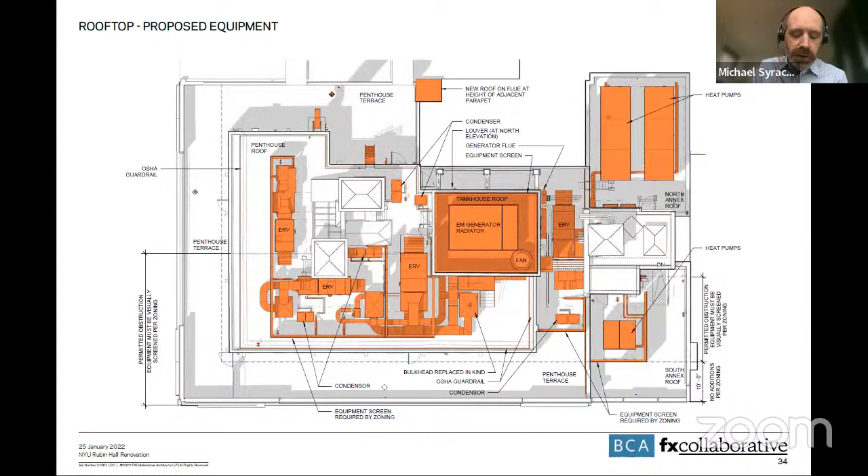Notably, at the south side and on the west side, we're adding a visual screen as required by zoning to shield the mechanical equipment from view.

This is a section looking at the building cutting through Fifth Avenue, indicating that none of the equipment is visible from directly across Fifth Avenue.

And a section similarly cutting through 10th Street, indicating that no equipment is visible because of the existing building construction to the front. This is a diagram indicating the zoning requirement for the mechanical screen, since the mechanical equipment protrudes through the sky exposure plane, as does much of the building.

We're required to add this perforated metal screen that will be in a matte finish gray color.

A mock-up was constructed on top of the building representing all of the rails, mechanical screens, and mechanical equipment that currently exists on the building today, for anyone to visit.

This diagram shows in yellow the surrounding area with Rubin Hall in the center. Any place shaded yellow indicates where the roof construction is visible to some degree, whether small or greater. The numbered views are specific photographs and renderings we'll go through on the next slides.

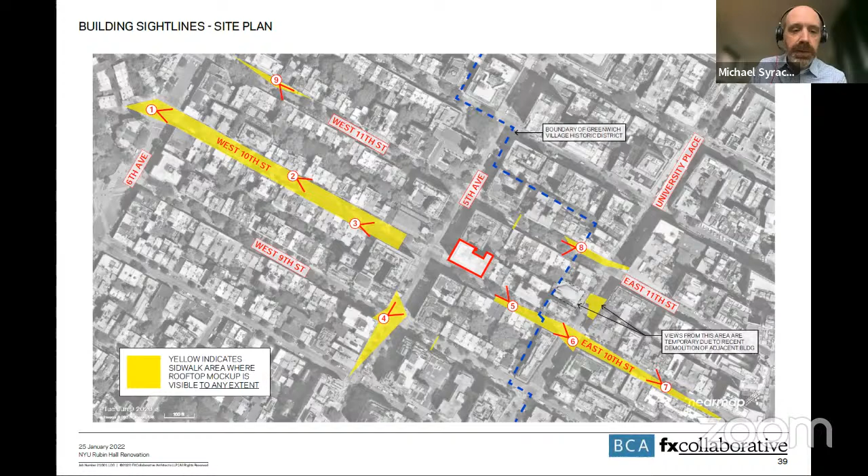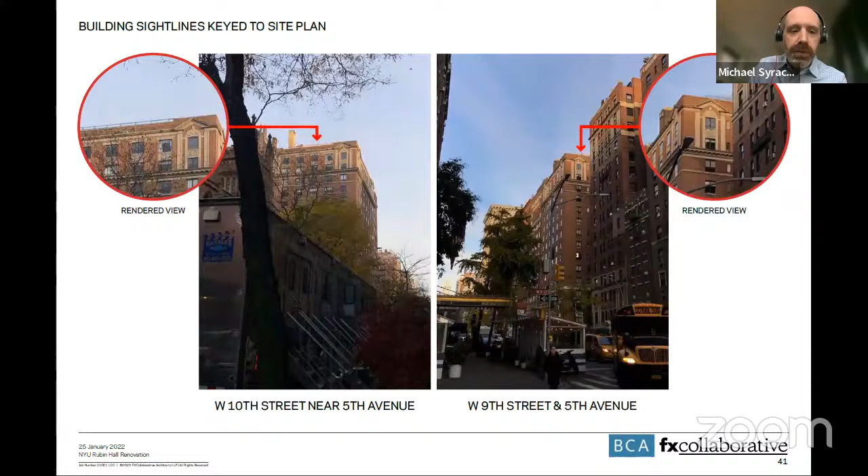Starting from the west at 6th Avenue and 10th Street, we have a photograph of the mock-up and an inset of the rendering, then closer to the building on 10th Street towards 5th Avenue, and near 5th Avenue again, swinging around on 5th Avenue looking north from 9th Street, with rendered views inset. These are views from the east on East 10th Street towards University Place, then East 10th Street near Broadway, and up on East 11th Street and West 11th Street.

So with that, I hope that you'll find our proposals are sensitive to the historic fabric of the building, and I'll open it up for questions.

Thank you very much. Commissioners, do we have questions? Any questions? Yes, Commissioner Lutfi, please go ahead. She's on mute. Did you accept the request to unmute? There you go, sorry about that.

I'm hoping you can clarify this. I was unaware that modern, double, well-insulated, well-made double hung windows might not meet the new local law requirements or passive house requirements. Could someone on staff shed a little light on that?

Yeah, Corey, would you like to start, and then the applicant can speak to their specific situation? I think the applicant can answer this for the most part, since they have a much larger building with different requirements and goals. But strictly speaking, for passive house projects that you all have reviewed, double hung windows have never worked to meet that standard. They've always been ones with simulated double hung and compression seals on the operating lower sash, so nothing's really changed. The applicant may want to clarify the differences between goals and requirements. Even Local Law 97 isn't so prescriptive—it's more about overall carbon reductions than specific requirements.

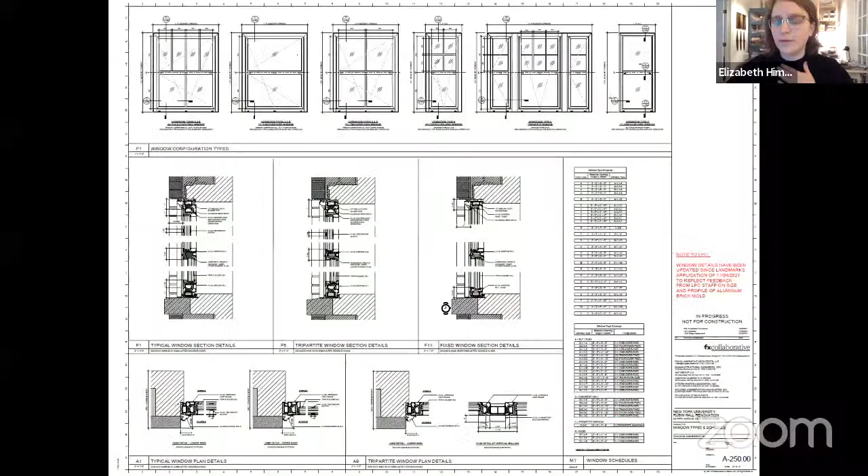And I can speak to a slide if that's helpful. If you want, Michael, go to the first slide in our appendix that we've provided, just to show how we— the next slide, and then the next slide.

I already mentioned the issue with the fixed over lower hopper window not meeting ADA criteria, which we need to meet because we're a dormitory building.

The casement lower, which we've seen utilized in this kind of situation—the windows are 6 feet wide by 6 feet tall, so that casement sash would be 6 feet wide by 3 feet tall, and the overall weight of the sash was too much of a cantilever for the hardware to manage.

The lower in-swing awning has some obvious issues with water infiltration. As soon as a student leaves that window open during a rainstorm, we're now filling the building with water. So that was not desired.

Then the last one we came up with was a lower outswing awning, which had some upsides and was kind of our front runner. But it does have some downsides from a maintenance standpoint. So we did consider that—it's one of the options that we narrowed down to.

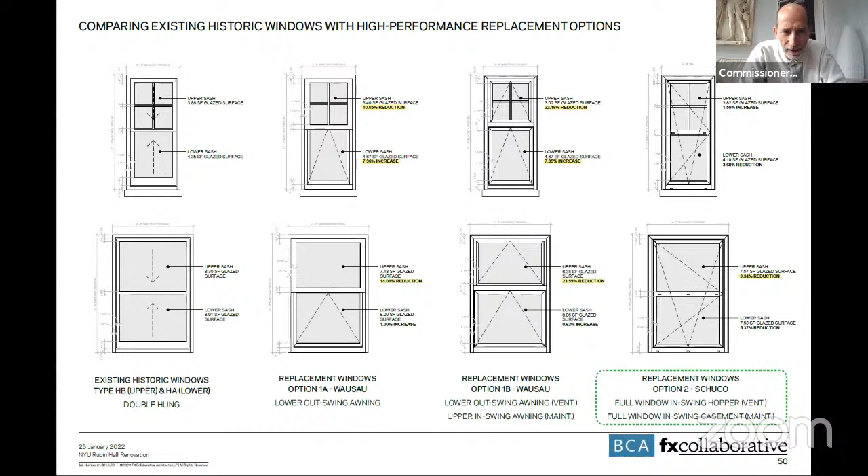So it's not symmetrical, it's not that the meeting rail moves up, and it's not a symmetrical double hung, it's an asymmetrical double hung.

Okay, and are there other questions? Excuse me.

Just one follow-up question. I know you're trying very hard to otherwise closely match the historic configuration and the brick mold profiles. Can you just speak to the muntin profile?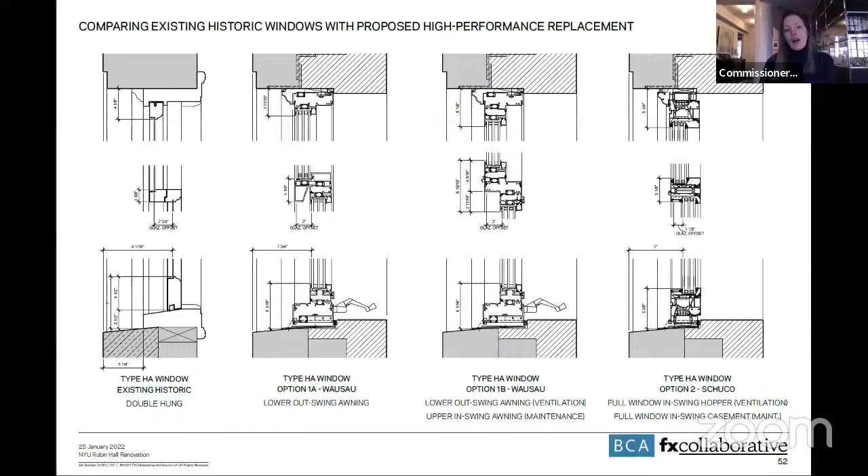Commissioner Shamir-Baron: I generally agree that if it's possible, if these are in fact custom windows, the custom application needs to go a little bit further, and maybe there can be a way to simulate or camouflage the fact that it's in fact one frame, but with some kind of planar shift in the upper or lower. But I feel very strongly about the first floor windows, that those need to not be aluminum windows potentially, and really, as much as possible, recall the historic configuration, dimensions, profile, and materials. Walking on Fifth Avenue there, you really do experience this ground floor, the fabric of the windows, and those have to be a different story in my mind.

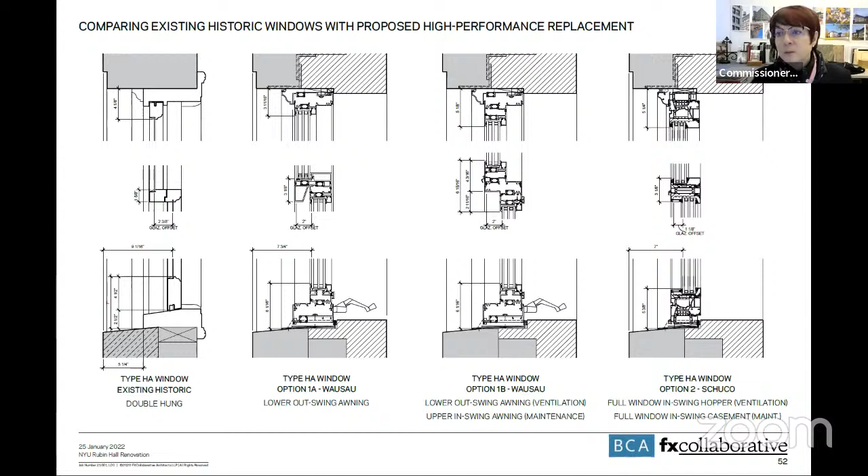Commissioner Holford-Smith: I agree with Commissioner Goldblum's assessment that a greater offset needs to be shown in the window between the upper and lower sash. Somehow, working with either Wausau or Schuco to improve that, make it look more like a double hung window. But I also agree with Adi on the ground floor windows, that they are so close, you come right up against them, that they need to be much more replicative than what they're showing currently. And the material may actually be something that meets our rules, but we can talk to them about other ways to be more replicative, or maybe the material in lieu of some other things. Maybe a kind of a menu there.

All right, so we're not going to take an action today. We recognize the challenges that you all have in all of the various levels of regulations that you need to meet and accommodate the dorm use. We feel that it would be helpful if you could do a little more investigative work with the manufacturer to try to come a little bit closer to the historic condition, particularly at the plane change for the first and second floor. So we'll take no action, and we'll have you back as soon as you're ready to come back.

Thank you. We'll move to the next item, public hearing item number 3. LPC 22-03566, an application for a certificate of appropriateness in the Borough of Manhattan, block 458, lot 27, 45 to 47 Second Avenue in the East Village, Lower East Side Historic District. This is a pair of Italianate style tenement buildings designed by John O'Neill and built in 1867. The application is to construct a rooftop addition.

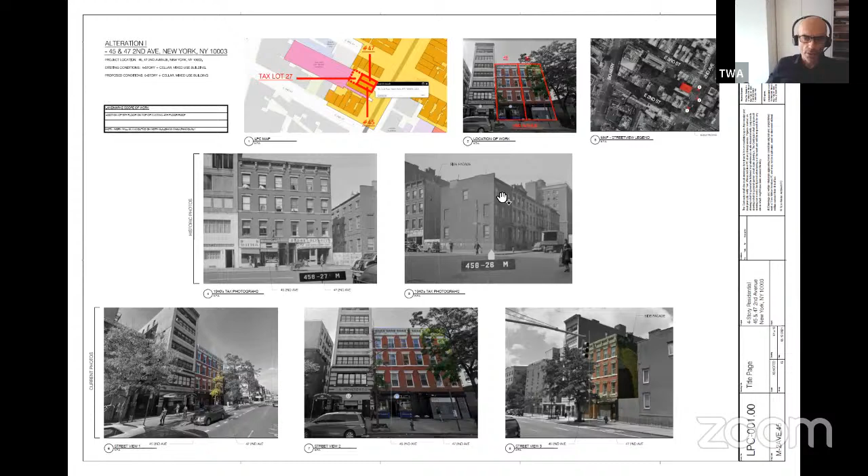We have some historic pictures from the 1940s. These are tax photographs showing the 4-story building, exactly the same way it looks today, except that we have a little bit less clutter with the signage on the first floor. This picture shows our building to the left and these buildings on 3rd Street, which were built a little bit earlier. They're 3-story plus a basement, so they are almost similar in height.

The bottom row is showing today's condition. Here's 2nd Avenue, we see this building here. We grayed out everything else to just put the focus on our building. To the left, we have a 7-story commercial building. These are different views looking north on 2nd Avenue, head on from the opposite side of 2nd Avenue, and then this is looking more from the north down.

Here's a context aerial picture where we show where our building is, to show a little bit of 3-dimensional context. Our building is here in the center. The proposed rooftop enlargement is shown in orange, which is set back from the street wall to make sure that we keep the integrity.

We have these five buildings on 3rd Street, 3 stories, and we see rooftop additions on these 2 buildings here, and they're pretty prominent also from the street view. A little bit further north, a taller building, a little bit further west, taller buildings across the street, which is outside the landmark district, but still notable.

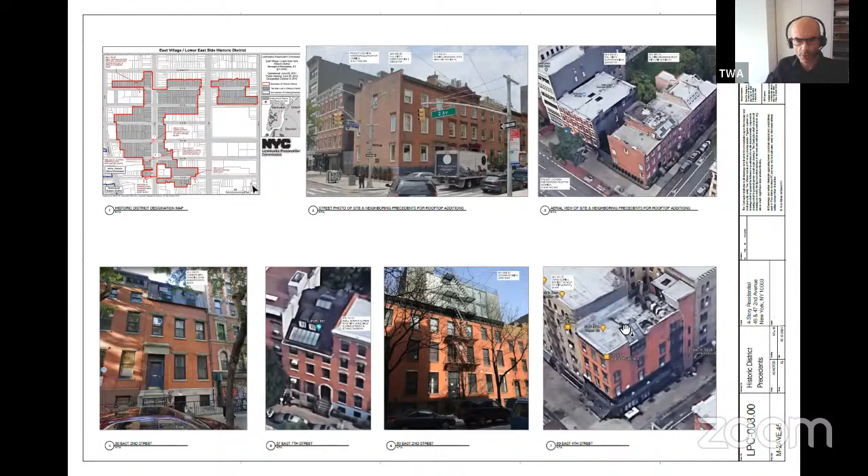We presented this to the community board, and the community board approved with conditions. Two of the conditions were to lower the overall bulk of the building. We initially didn't have a railing, just a parapet wall. We lowered the bulk of the vertical enlargement, and we also reduced the ceiling height on that 5th floor to further minimize the visual impact.

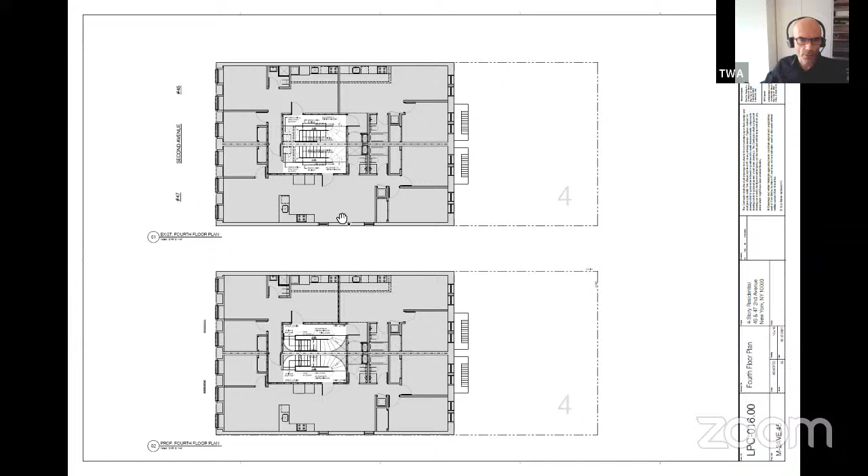Floor plans on the 4th floor, don't need to go much into detail. This is the proposed 5th floor plan with the 2 stairwells. Then we have the roof plan with the mechanical equipment here, which is screened, and the remainder is the recreational roof. Window schedule, don't need.

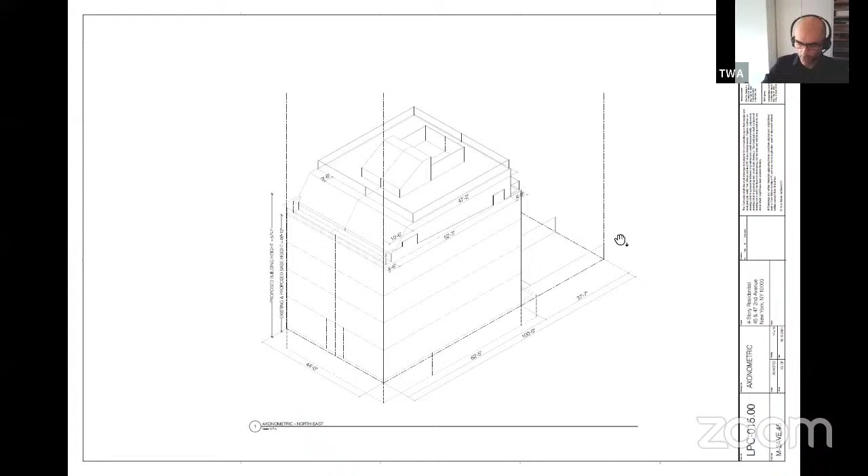Yes, of course. Thank you. So we actually took the comments of the community board into consideration. As I mentioned before, we initially had a parapet wall instead of a railing, so the building bulk was about 3.5 feet taller, and then we also lowered the ceiling height on the 5th floor by almost a foot. So we got the overall bulk reduced by more than 4 feet.

We also set the front facade further back, and we leaned it actually further back, to further diminish visibility. The comment regarding the windows may have referred to a previous submittal that we initially proposed to the community board, which actually had dormer windows, but we omitted these dormer windows, also responding to comments of the community board, because they looked indeed too prominent.

And so we now have just roof windows, and I can probably show this. Do I have control over this presentation? No? Can you tell me what slide you were looking for? I'm looking at a front elevation. Yeah, keep going.

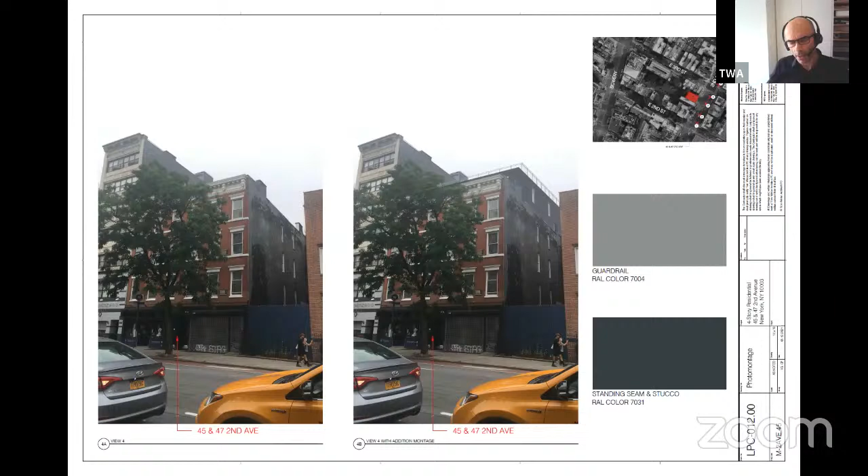This is because it's only a 10-foot wide window. This is not the main visibility, so any person who would pass by would have this view only for a very short period of time. All the other views are more dominant.

Can you go one more into that same direction, please? Yeah, so this is the view from 2nd Avenue, looking north to south. And so one of the comments was that this is essentially a corner lot. But it's obviously not a corner lot because the corner lot is occupied by this building here.

And we also have a rooftop enlargement on the second building in, so this is not a new theme to what we're doing, or to this area rather. And I feel strongly that this rooftop enlargement blends into the gray of the adjacent building. It would be a much different story and discussion if this tall building wasn't there.

So we feel there's a proper backdrop which reduces the visibility of our enlargement. And again, looking from 2nd Avenue straight to the building, or looking from the south, there's very, very little visibility. Thank you.

Commissioners, do we have any other questions? Yes, Commissioner Shamir-Baron. Can the applicant address the point about the visibility to and from Marble Cemetery, which is a public situation, isn't it? More so than a sort of private or less occupied or less populated donut hole.

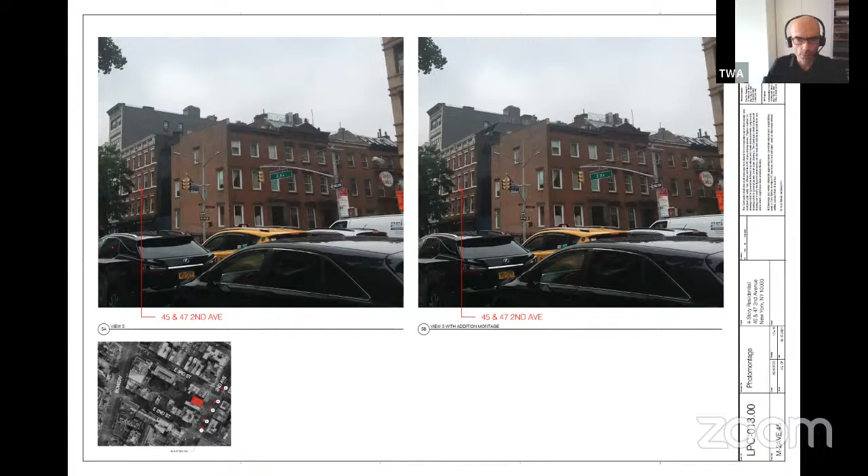Yeah, can we go in the presentation to page 2, please? Okay, thank you. Yeah, so the marble cemetery is a center block, and you see this in the... could you please point on it? Yeah, exactly, that's the marble cemetery.

The cemetery is, as far as I know, open to the public, but only in very limited opening hours. I have been to this building many times in the past months, and there is quite good visibility from the building, even from the second floor, over to the marble cemetery.

And I have never seen anybody actually going to the marble cemetery. It's not an empirical thing, it's just my personal perception that yes, it is a notable area in the middle of this block.

But I believe that the visibility discussion from the public, from public streets, is probably a more significant discussion, as the marble cemetery is not an area which is largely populated or frequented by people. It's not technically a public way; it's private.

Yeah, commissioners, the marble cemetery is not a public way. It has a locked gate. It's privately owned, you know. It's not a public way as we use the term.

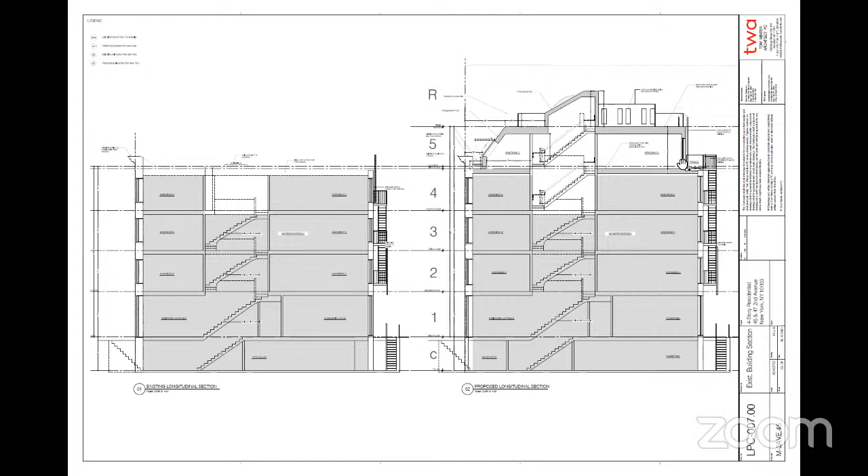No, well, are we talking about the front setback or the back setback? Back setback. Oh, I'm sorry, back, okay. The rear wall is set back a little over 4 feet from the rear facade. Yeah, so he's talking about the second level. Yes, the back setback is 4'6".

And at the second level, what's up there is 10 feet. This is just a screen for the mechanical equipment, which is 6 foot tall, and very much set back because it's only in the center.

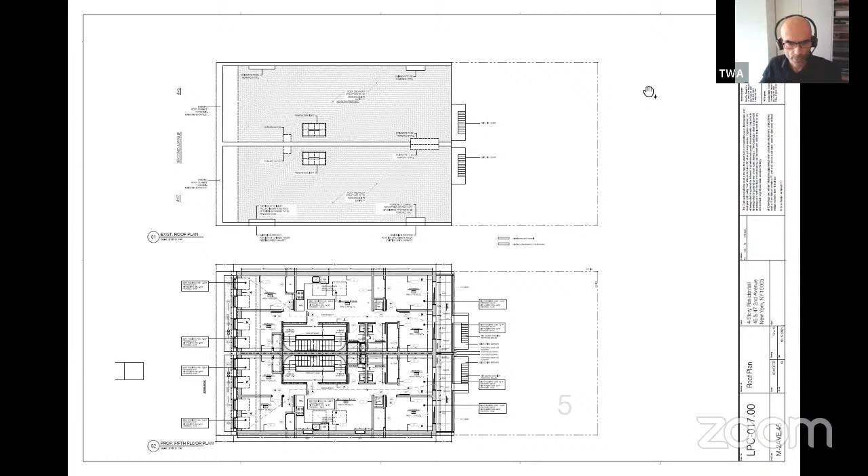You can go 1 page back, please. Oh no, I'm sorry, go the other way. I just want to show the floor plan. Keep going that way. That screen you were referring to when you said 10 feet back? Yeah, so here we see it. You can go to the axon. Sorry, I wish I had control over this. Yeah, this is good too. So go 1 slide forward. I'll give it back to you in just a second. Okay, great, yeah, I appreciate that. Thank you. Just click on your screen. Yeah, okay, got it. Okay, wonderful.

Okay, so we see mechanical equipment here, and the screen is along the outer perimeter of that mechanical equipment. It's 6 foot tall, and it's very far set back from all sides. So the visual impact is marginal, if any at all.

Okay, commissioners, if there are no other questions, I'm going to start to send you a request to unmute so we can begin our discussion. Commissioner Holford-Smith, would you make a motion to close the hearing? So moved. Commissioner Devonshire, would you second the motion? Second. All in favor, say aye. Aye. Any opposed?

All right, the hearing is closed and we'll begin our discussion for this proposed rooftop addition, which is taking its inspiration from the studio window type additions around the corner on similar buildings. It's set back from the rear 4 foot 6 inches; typically we require a minimum of 3 foot setback. There is visibility over the primary facade—you see the very top of it, and then through the gap and over the side facade on the adjacent building. So we'll begin our discussion. Commissioner Lutfy, would you start this one?

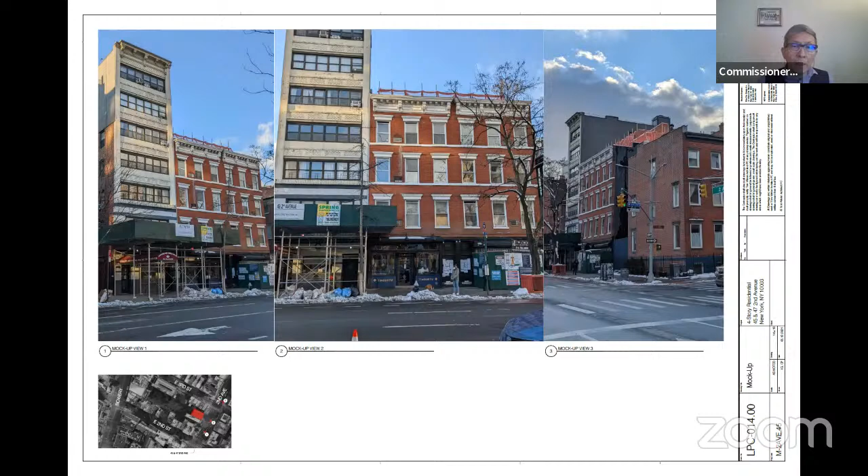Commissioner Chen: Yeah, I guess there's a consensus here about the visibility from Second Avenue and about the railing. I agree with Abby and John and most of the comments.

Okay, great. So I think we won't take an action today—we will ask the applicants to restudy the proposal. I think everybody is comfortable with the presence of a rooftop addition here, but the overall scale, height, angle of the slope at the front, fenestration and material need to be restudied to reduce its appearance and presence. So it's just a little bit more work and then you might be there. We'll take no action and see you back when you're ready.